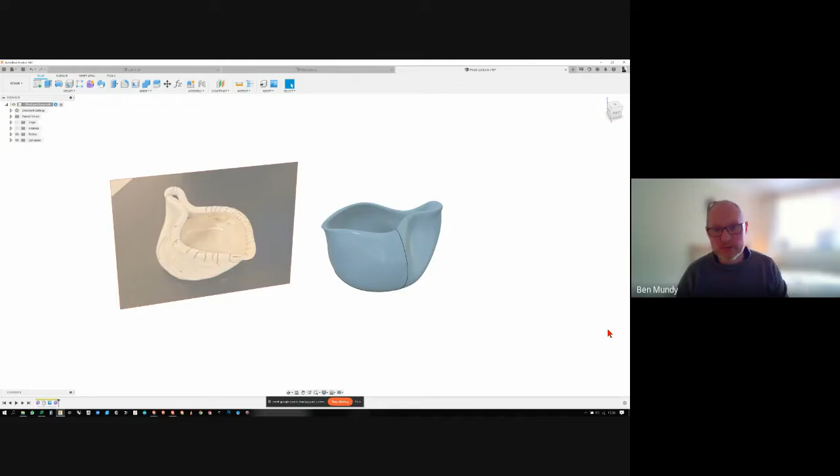Before we get into how I did that, I think it's worth showing you how to get into the Sculpt environment and some of the basic tools you'll find in there before we start looking at this main example.

So I'm just going to quickly open up a new design within Fusion, and we'll have a blank piece of paper basically. We're at the top level of Fusion, in the design workspace - that's where the Sculpt environment sits, amongst all your other standard 3D modeling tools like extrude and revolve. You can tell it's the Sculpt function because it's the only purple icon in the toolbar, and it's kind of this.

It looks like an exploding purple blob, basically. I'm not sure why they use that icon, but that's the create form or the Sculpt function, and that's what we're going to start working with.

So when we open up a new design, this is what we'll find in Fusion. Hopefully most of you have been on stage 1 or potentially stage 2 of the introduction to 3D, so I'm not going to show you all around the interface of Fusion again, because hopefully you'll have seen that. But if there are any questions or you're not sure about anything, just pop them in the chat as we go along and I'll answer them.

So in the main toolbar along here, we've got our create form button. It used to be called Sculpt in Fusion, and that's where I've got used to calling it. They've changed it to create form, but that's why I will sometimes flip between the words sculpt and form. I'm just going to press this button up here, and you can see that the toolbar has changed, and we're essentially now in this Sculpt function environment.

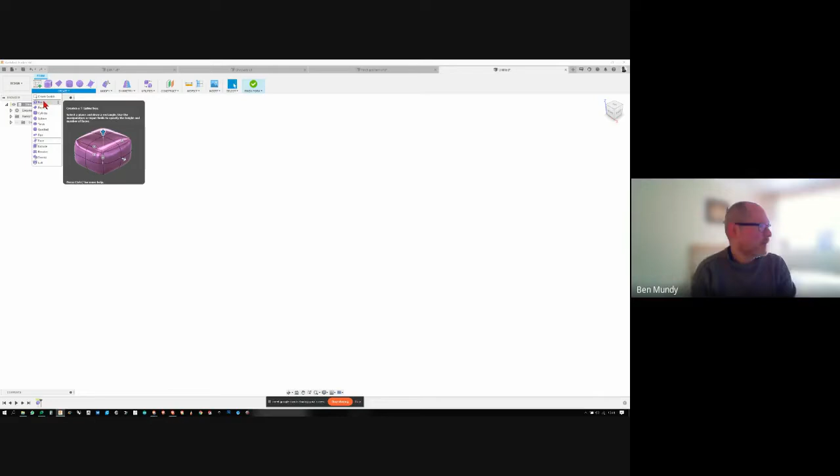So the first thing I'm going to do, just to show you how the Sculpt function works, is I'm going to use one of these primitives. So I've got the create menu here, and I'm going to create a box. The box function is also up here as this button as well, so I'm going to click on that.

You can see that what happens is that our origin comes up with the 3 planes, and we need to select a plane to start. We need to tell Fusion where we want to put our box. I'm just going to click on one of these planes to start drawing my box. When I hover over it with my cursor, the one that turns grey is the one I'm going to select, and it doesn't matter which one you select. I'm going to select the top bottom plane, so I'm going to click on that.

I don't know if you can see, but next to my cursor, I've got a little crosshairs now, and this is the midpoint of where we're going to start drawing the rectangle that makes the box. I'm just going to click on the origin point and click once more with my left mouse button, and this starts to drag out a rectangle. If you want to, at this point, you can add dimensions to the rectangle. I'm not going to bother, I'm going to work in a much more freeform way. So I'm just going to make some kind of rectangle and click with my left mouse button again.

And once I do that, hey presto, we're presented with this kind of blobby type box, this kind of rounded off box, and this is our primitive. This is the shape we've got from pressing the box button.

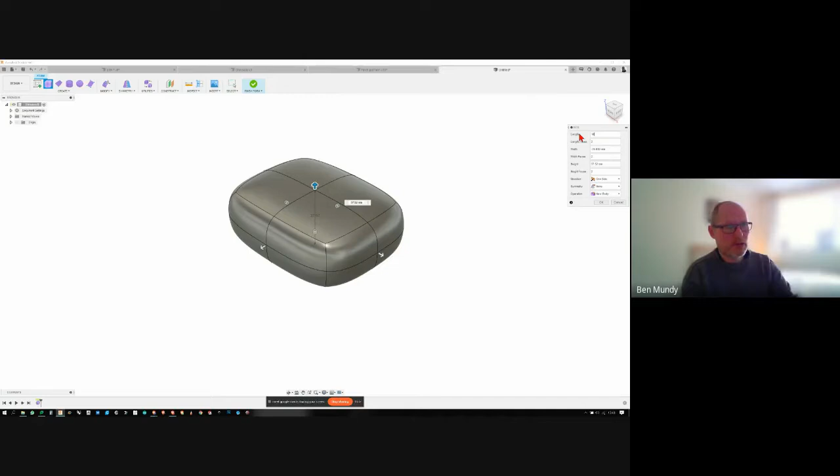Now we've also got a dialog box over here on the right hand side, and what we can do is start to change things within this box. We can change dimensions if we want to, we can make it whatever dimension we want, and we can change the number of faces it has. But let's not focus on that too much at the moment. What I want to show you really is how you start being sculptural with Fusion. So we've got our primitive here, I'm just going to put it around so you can see it.

To start actually playing around with it, pushing and pulling and twisting and all of those kinds of things, we're going to use the Edit Form button in the Modify menu. It's the one right at the top of the menu, but it's also this button here as well. So that's the way we're going to select that, and I'm just going to click on it.

Now we have this dialog box again over here, and there's lots of different ways we can select stuff, but we're going to ignore that for a moment and just have a look at the box itself.

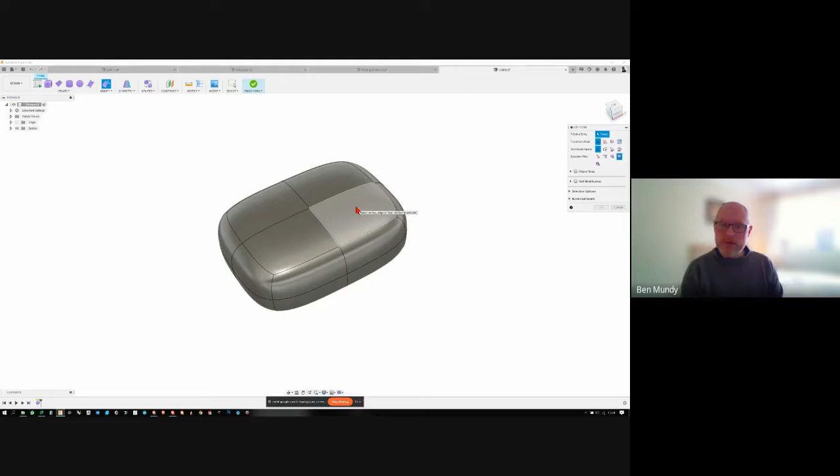Whilst I'm in the Edit Form function, I'm just going to click on one of these surfaces, and that selects that surface. When you do that, this rather complex looking modifier pops up. What I'm going to do is show you what this modifier does, because this is really core to using the sculpt function within Fusion and understanding it. It's pretty straightforward once you start playing around with it. I'll just zoom in a bit so you can see it better.

So this is the face that's been selected. If I start moving around some of these handles on this modifier tool, you can see what happens. This handle is an arrow pointing upwards, and if I click and hold down with my left mouse button and drag it up, you can see it drags up that surface. But it also drags the other surfaces in conjunction with it to some degree, and it does this in a fluid motion, so you'll always have a rounded, smooth form.

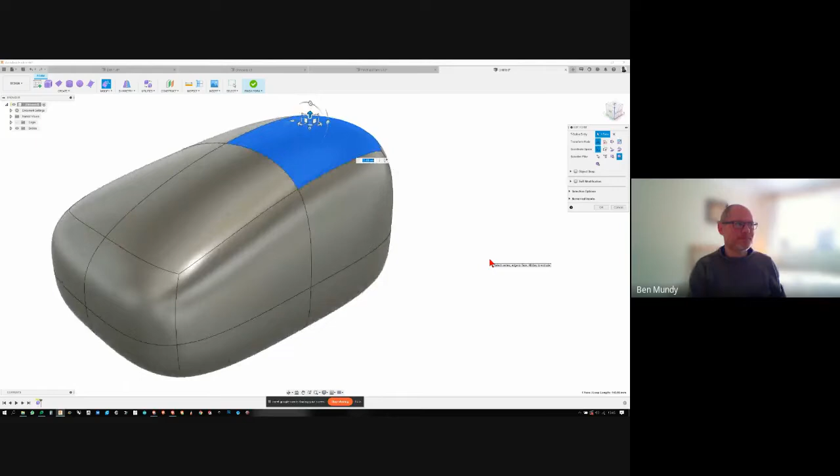So with this arrow, you can go up and down, so you can depress and push into things, or lift them up. The other arrows do the same in other directions. This arrow pulls or pushes along that axis, the x-axis, and this arrow over here does the same in the y-axis. So even just with those three arrows, you can begin to see how quickly you can start to mold your shape into something other than just a box.

So what happens if you want to move it in a direction other than those three set directions? That's a bit limiting. So what we have are these little squares in between each arrow. If you look at this tool, these squares sit between each of the arrows. This arrow pulls in this direction, this arrow pulls in this direction, but this square will pull and push in both of those directions at the same time—essentially on that plane, it will move it around along that plane. It's the same for these two arrows, this one and this one: the square in between them moves in both directions at once. And the same for the final pair as well. So those are the arrows and those are the squares.

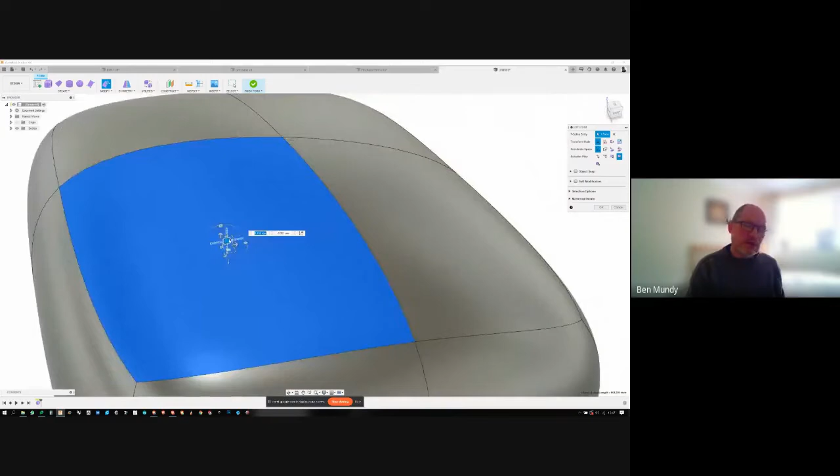What else we can do is also rotate this face, and we've got these arcs popping up here. We can grab hold of one of these circles in the middle of one of these arcs and start moving it around by holding down the left mouse button as you move it around, like dragging it around its arc. You can even set the degrees if you want, or just move more freely. Again, because we're working in 3 dimensions, we have 3 different rotator modifiers working in 3 different directions. So with one tool, we can move things in all 3 directions, and rotate things in all 3 directions.

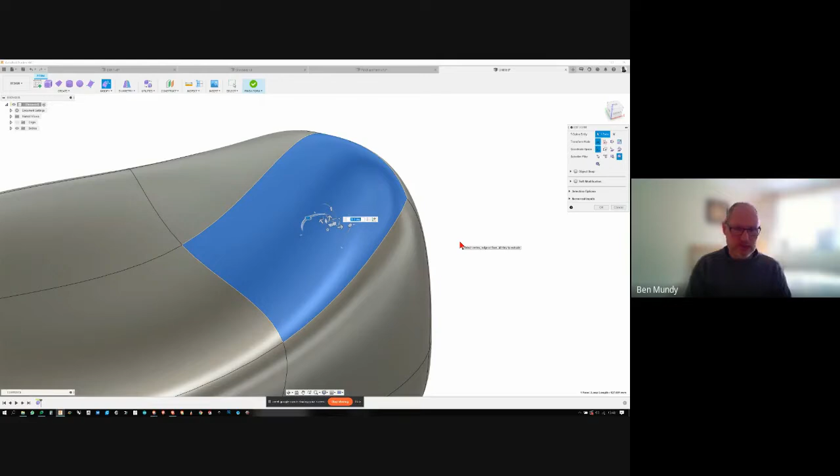But there's one more function the modifier tool has: we can also make this particular face larger or smaller in relation to the rest of the object. We've got these little lines around the edge of the square here, and these will scale the face in that direction. So I can scale that face up and down, scale it backwards and forwards along that axis, or in both axes.

We can do that the same for any of these modifiers, or any of these planes rather. We can scale it up in any of the 3 dimensions. And then finally, the last thing we can do is scale up and down the whole face, by dragging this one backwards and forwards. Just clicking on that and holding your left mouse button down and moving your mouse around slowly will scale that whole face up and down.

I just noticed in the chat. Sorry, Ben. Sorry to interrupt. We've got 2 questions, because I think 2 of the participants lost their connection for a bit, and they're wondering how you managed to create that form.

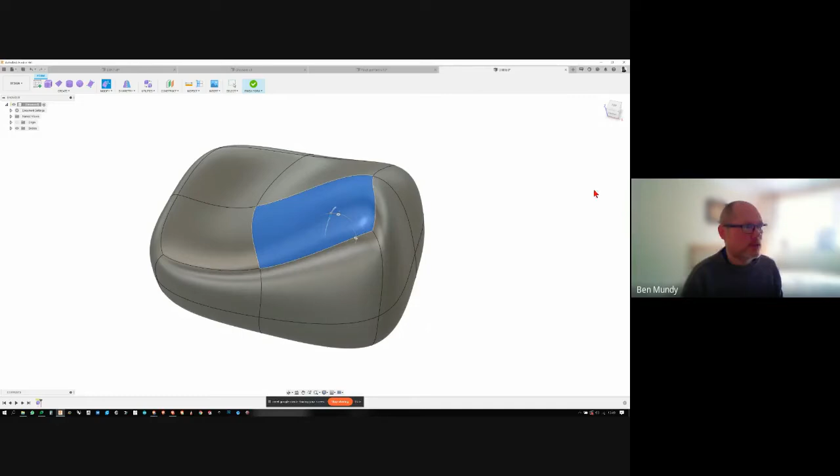Can you take us through that again? Yeah, absolutely, no problem at all. Let me just turn that one off and do it again.

So to create that primitive box, that first form, we're going to go up to the Create menu, and we're going to select Box. The same button also exists up in the toolbar, this one here, so either way. Once you click on that, you'll get the origin pop up, asking you where you want to start drawing a box. You need to select a plane onto which to draw a rectangle, which is the basis for drawing the box. It doesn't matter which plane you select. I'm going to select the top bottom one just by clicking on it when it's grey.

Now, it might be hard to see, but there's a little crosshairs on the tip of the mouse cursor, and this is the center point of the rectangle we need to draw. You can draw it anywhere, I'm going to draw mine on my origin. So I just click once, let go of the mouse button, and move your mouse around and it will start dragging out a rectangle. At this point, if you wish, you can put some dimensions in, or not, it's entirely up to you. Once you're happy with the size of your box, click your left mouse button once more, and we will have our box appear.

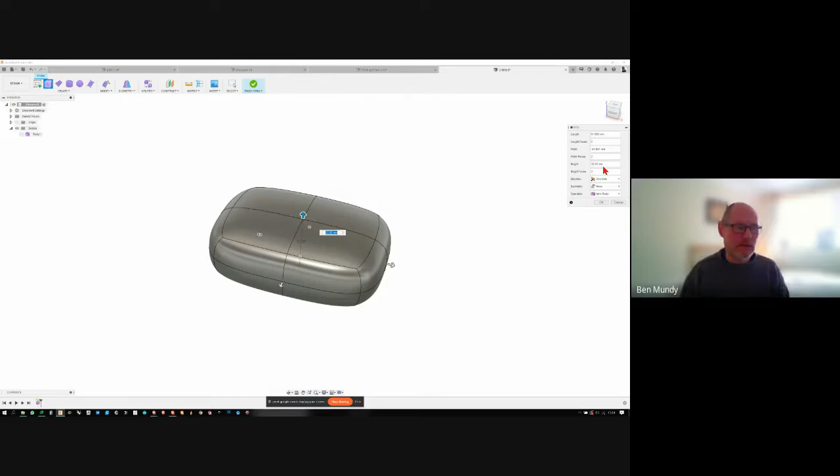We have our box modifier dialog box over here. I didn't show you this before, but I'll show you once again. We can change the dimensions of our box, but we can also create more faces in our box. At the moment, the box is subdivided into different faces, we've got 4 on the top, 4 on each side, and 4 on the bottom. But we can add more. We've got length faces, width faces, and height faces, so we can add as many as we like.

You can see what happens as I enter the number 4 into each of those dialog boxes. We end up with, instead of 2 faces across the height or width of it, we've now got 1, 2, 3, 4. It's entirely up to you how many you want. The more faces you put into your shape, the more detailed it can get. If you want a smoother, more fluid shape, you might want fewer, and you can always remove them later on if you want to. I'm just going to take this back, leave it something like that.

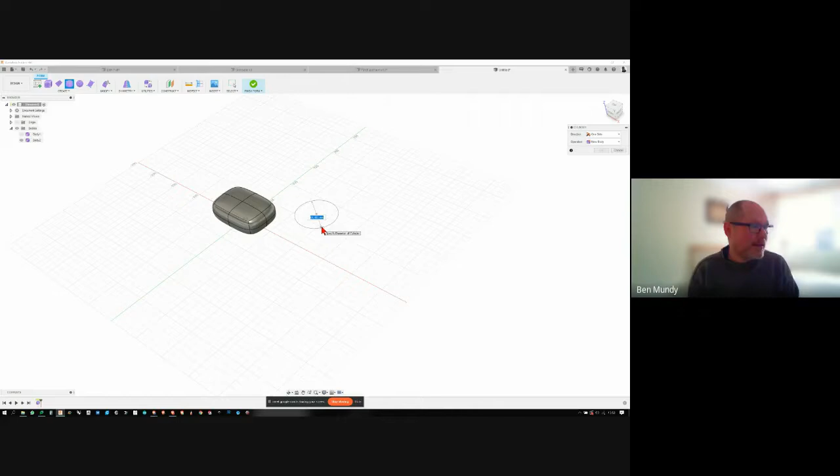So that's how a box is made, and it's the same for any of the other primitives as well. When you select any of these ways of making a primitive form, say we were going to create a cylinder, exactly the same thing: we need to choose a plane on which we're going to draw our cylinder. Again, I'm going to choose this plane, and we need a center point of that cylinder, then we can drag that cylinder out by clicking once with your left mouse button and moving your mouse around to the size you want, then clicking another time to actually create it.

And then we can modify that cylinder just by dragging it up, making it bigger, like so, or inputting information into the cylinder dialog box. So for any of these primitives, it's the same kind of approach. You have to choose your primitive and decide where you want it to be in 3-dimensional space first, before Fusion can actually create it. So get rid of that one.

So with the modifier tool, that's the core tool really that you're going to be using within the Sculpt environment. But there are other tools as well.

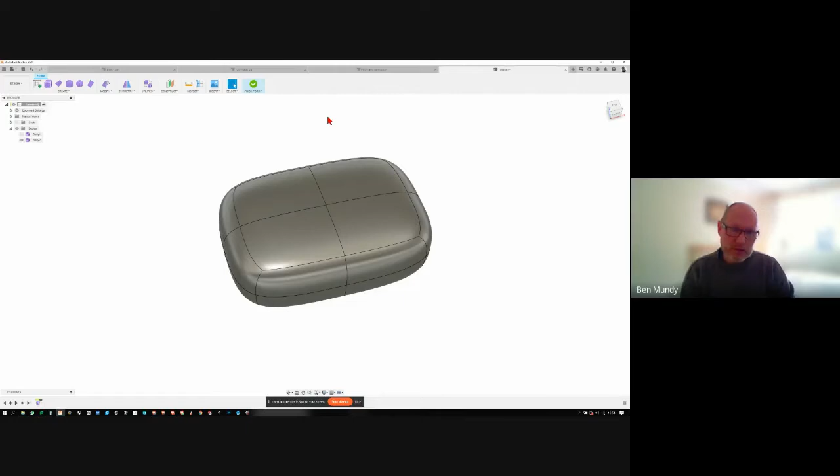One thing I'm going to show you right at the outset is the symmetry tool. Sometimes you want to create a form that has no symmetry, a completely organic object. But a lot of the time things we create do have some kind of symmetry, the same on the left-hand side as on the right-hand side. So Fusion's got a tool which can create lines of symmetry around any of the forms you've created in the Sculpt environment, and it means it's very easy to create symmetrical objects.

How do we do that? Well, we've got the create menu, the modify menu, and next to it a symmetry menu. There are different ways of creating symmetry, but I'm just going to show you one for today because it's the one you use most of the time, or I do anyway. It's this one, the mirror symmetry tool. It's very simple to use. I'm just going to click on it here.

What I need to do is create basically a symmetry line, like a plane around which both things happen the same on both sides. So I want my symmetry plane to run along the midpoint of my box. I'm going to select a face on this side, then select a face on that side by clicking on them with my left mouse button. If I do that, what we can see is that Fusion has created this green line all the way around our box. That's a line of symmetry now, or an axis of symmetry. I'm just going to click OK if I'm happy with that.

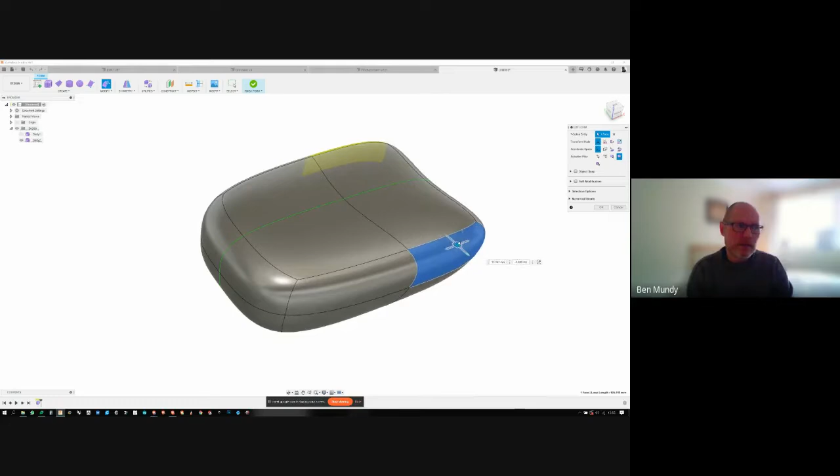So now if I go and use my edit form tool, which if you remember is the one in the modify menu, edit form, or it's the same one up here, click on that. Now say if I click on this face and start dragging this around, you can see the same thing happens on the other side of the form. So if you want to create a symmetrical object, it's very straightforward. What you do on one side is mirrored on the other side, and that can be a really useful function.

With the edit tool and the symmetry tool, there's a lot you can do in quite a quick period of time to start modifying your shape into something that might be recognizable.

So we can do a number of things with the edit form tool. We can modify a face like so, but we can also modify a line instead of just a face, and you see the line's moving rather than the face. We can also just modify a point as well, pulling that point out so that it's just that point being moved.

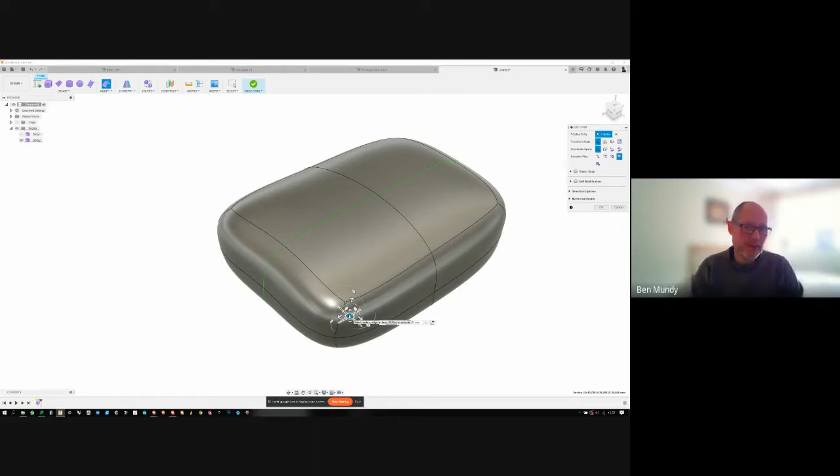It can be tricky to know when you're trying to create some kind of sculpture object which is best to use, whether you want to modify a face, a line, or a point. There's no right or wrong way really of doing it. It's really a case of playing and experimenting, in my experience, with the edit modifying tool to see what works and what doesn't work in what you're trying to achieve. There's no set way, in my mind, of doing it.

The other thing you can do, you don't just have to edit one face or one line at a time. You can edit all of them or a selected number of them. So say I wanted to edit this face, and this face, so these three faces, I select one, then hold down the Shift button on the keyboard, and whilst I've got that held down, I can select as many faces, lines, or points as I like, and that modifier tool will start to affect all of those.

So now when I move that up, you can see it's not just this face that's being modified, but all of those faces are being modified. And it's at the point where the grey faces meet the blue faces where the actual real stretching, or compressing, occurs.

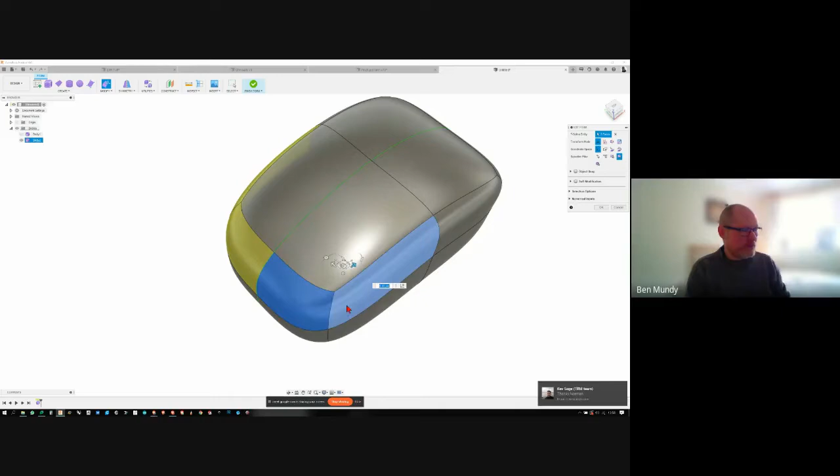Hopefully you can see that that's a relatively simple way of starting to make a form which would be hard to make using standard modeling tools that you find in Fusion. And we can play around with this to our heart's content, and it's quite easy to get to something quickly, which might look something like a computer mouse, for instance.

Bring this in, put a little undercut in there, select maybe this line, down. The whole thing's a bit too tall. So you can just play around and grab the surfaces and start playing around till you get a shape which you like the look of. Let's see, I'm going to select this one and make this a bit more curved at the back, pull this out so it's a bit more rounded.

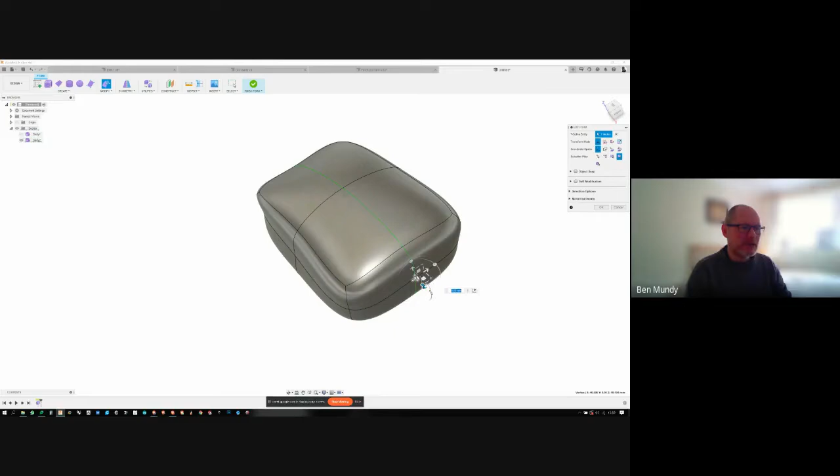So to round something off, this was a flatter form. I've just grabbed the middle line in between those two faces and pulled it into a more circular, bulbous shape. Whereas if you go in this direction it goes more concave. Selecting the line there will do that. Whereas if I select the faces here, that will just move the whole face backwards and forwards. I could try and select this point, and that would work, but then you're going to be making the whole thing rounder in that direction as well as that direction.

So it depends what you want, obviously. But it's a case of really playing around with the edit form tool and familiarizing yourself with the different ways that it works. I find it's quite fun—you can tinker to your heart's content to get it just how you want it to be.

Now, with Fusion, if you've used it before, you'll know it records in the normal design workspace every step you do along the timeline down here. But you can see we're in the Sculpt environment, which is represented by a single icon down here. What we don't have in the Sculpt environment is a record of every single edit before—it's literally more like a piece of clay. You can't go back in the same way as you can in the rest of Fusion, so once you've pushed something, you can't unpush it a few steps ago through the timeline.

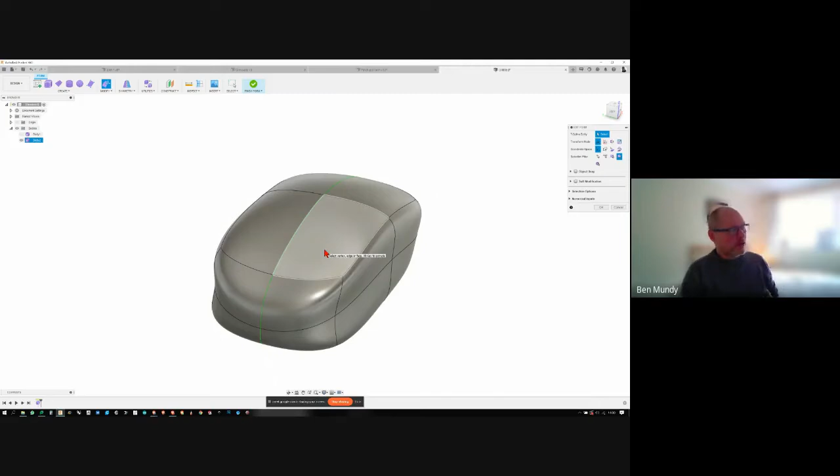However, we've got good old Control Z and Control Y, the undo and redo functions, which are pretty common across a lot of programs. So we can undo and redo your last however many—I don't think there's a limit on how many you can do. You can go back and forward as much as you like. If you go to the edit form, the undo and redo menus up here in the top left-hand corner, there's a drop-down menu of the last, say, 20 or so, but you can go back further than that if you wish. So that's the way you can go backwards and forwards with things you've done in the past and things you want to redo.

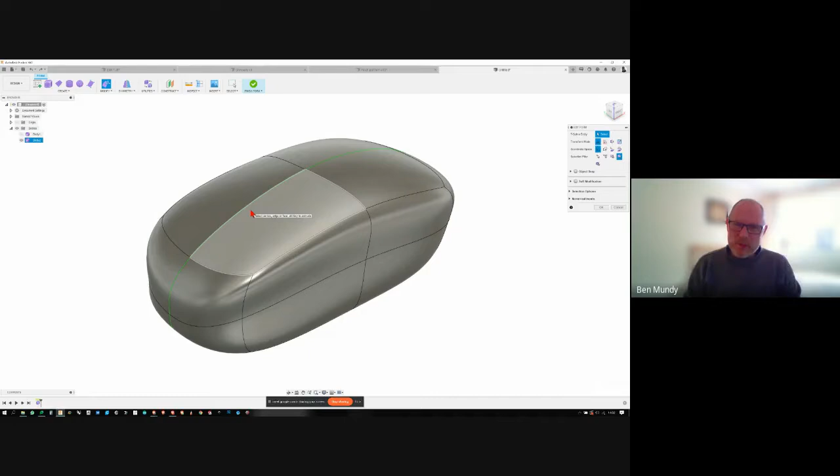So we've got the edit form tool, and that's really good for making blobby shapes. But not everything you want to create is going to be blobby—there's going to be angles and things you might want to put into a sculpted shape. It's useful at this stage to show you how to do that, because once you can put sharp creases into things and curves, combined with the edit tool, you can make pretty much any shape that you want, given enough time.

So say, for instance, I wanted a crease around the bottom, a sharp edge rather than this nicely smoothed edge. The way to do that is in the modify menu, with the crease function, about halfway down. With anything in Fusion, if you hover over any menu option it gives you a useful pop-up box with a visual description of what the function does. This one creates a sharp edge between faces, very simple. I'm going to click on that, and we get our crease dialog box popping up over here.

It's basically asking us which of these geometry lines we want to crease—it has to be one of the lines that we've got here. So I'm just going to work my way around and click on those ones there. And if you remember, because we've got our symmetry line here, you just have to do it on one side and repeat that on the other side.

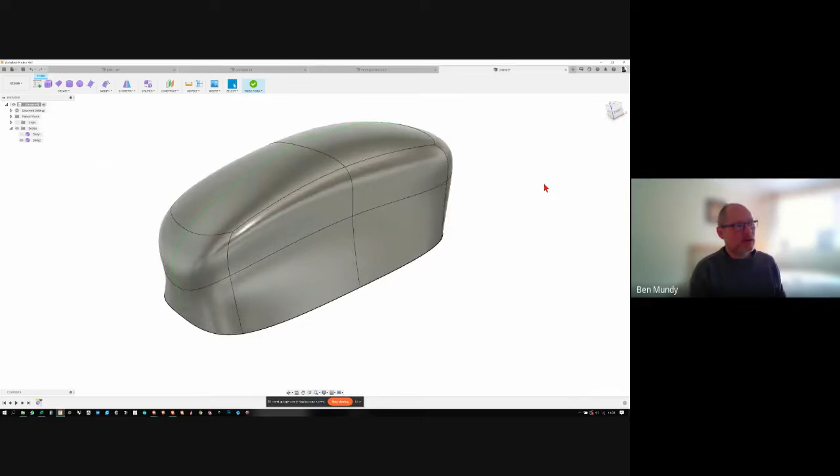I hope you're happy with that. Click OK, and it turns from being bright yellow back into the color we're working in. And you can see now we've got a creased line around our chosen vertices.

So we can still modify this. You can still go back and click our edit form button and start to modify this as well. Maybe that's a bit too wide, I want to bring it in, maybe have it slightly underneath the form, like so. Maybe we want to have it up a bit. Maybe not, maybe like it like that. So you can still modify these elements as well, as much as you like.

Ben, we've got a question from a participant who's asking about designing a car. Would you recommend using the Sculpt environment for that?

Definitely, yes. I'm assuming you're asking about the body of a car - there's obviously lots of components that go into making a car. For the outside of the car, yes, definitely the Sculpt environment is the right thing to use. There are some great resources on YouTube specifically about how to use the Sculpt environment in Fusion to design a car, and it's actually really good for car design. It's quite advanced, the kind of Sculpt tools you're going to be using, so it's not somewhere I'm going to go in this workshop, but yes, definitely a good option if you want to design a car.

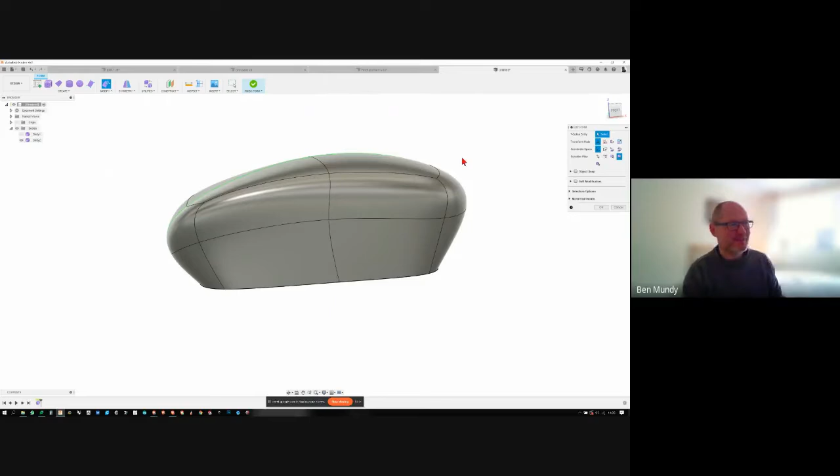But for now, we'll keep it a bit simpler and go back to drawing this mouse. You can see we're beginning to get something that might look a bit like a mouse, and you can play around and select as much of it as you like - bigger, smaller, wider, whatever you want to do, really.

Just by playing around with all these different functions and seeing what works for you - I'd say the only way you can really understand the Sculpt environment is to start experimenting with it. What we'll do later is ask you to make a box, a bit like this, not necessarily a computer mouse, but you could do that - just to start pushing and pulling and getting a feel for this function. I'll be on hand to troubleshoot and understand any problems.

But before I do that, I thought I'd show you how I used this to make that vessel, that pinch pot, which I showed you earlier, and also some real use case examples we've done in the Fab Lab using the Sculpt function. So I'm just going to move over to the pinch pot form design.

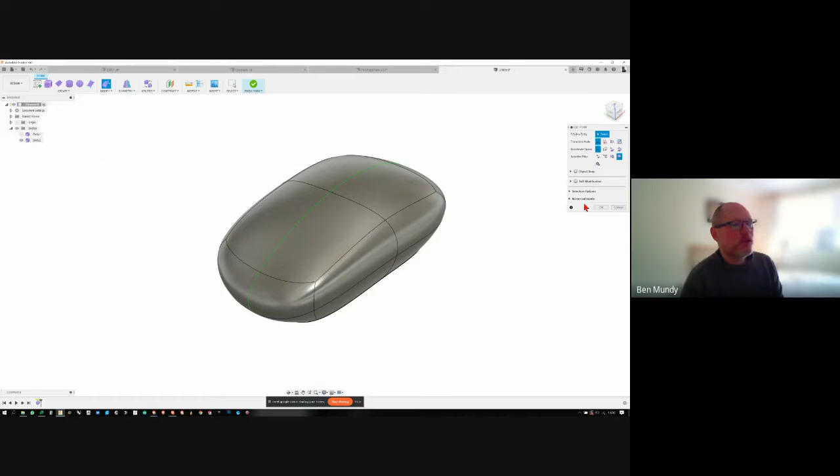Obviously we can just start playing around in the Sculpt environment, but often when you're designing things, you might start off with a sketchbook and some 2D sketches. It's worth showing how you bring those 2D sketches into Fusion and start using them as references for your Sculpt form - that's a useful way of transferring your ideas from a sketchbook onto a 3D platform like this.

So I'm going to do a new design and show you how I go about that. Before I do that, what I did was basically sketch this jug from 3 sides - looking down from the top, a straight-down top view, looking from the side, a straight-on side view, and looking from the front. So we've got 3 sketches in what might traditionally be known as an orthographic projection - the front, top, and side views in drawing terms. We can bring those sketches into Fusion and use them as reference, so I'm just going to create a new design.

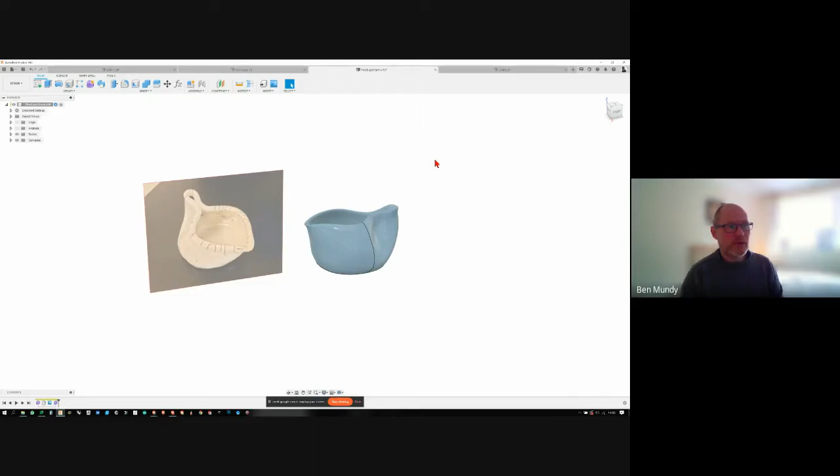What we can do within Fusion, before we go into the create form function, is insert a canvas, which basically means insert a picture. For the gentleman asking about cars, this is a way you might take a car design from a sketchbook and start using it for reference when you're 3D modeling.

So I'm going to click on canvas, and let's see, I've got them here somewhere. I'm just going to click on the drawings of my jug I did earlier. It's asking me where I want to put this sketch, what plane I want to put it on. I'm going to put it on the side plane, the right plane, because this is the side sketch. I'll click on that one.

I'm just going to zoom in a bit so we can see it. It's kind of just a hand-drawn sketch of the side of my jug, a very low quality sketch. It doesn't have to be a beautifully drawn thing at all. I'm just going to click OK. So we've got one sketch here.

That's fine, we know what it might look like from the side, but we might also want to know what it looks like from the top and the front, so we've got all three views in one place. I'm going to add another couple of sketches in by clicking on canvas.

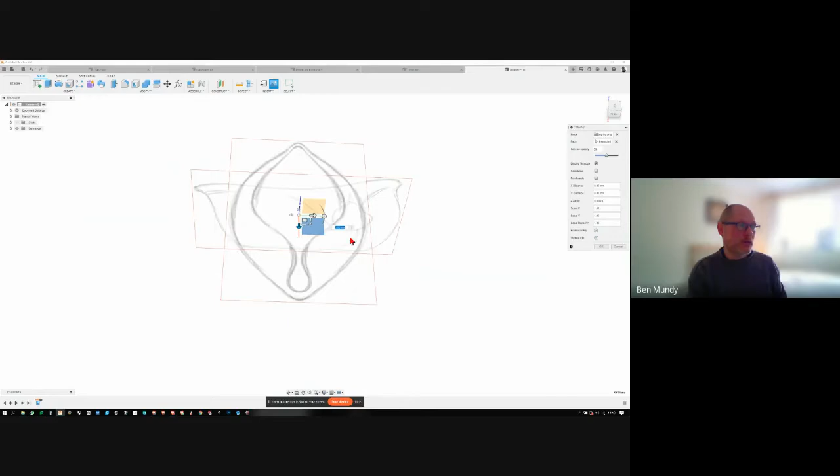I just wait for that to upload. So I've done the side, let's do the top. This time I'm going to use the top plane and put this in on the top. Now we can see that's not coming the right way round, so we can just turn that round, so it's that way round. That makes sense. Click OK.

So now we've got our side view, we've also got our top view, and this is really useful because they're intersecting each other like that. We can start using those as reference material in a minute. Then the last one I'm going to put in is the front view.

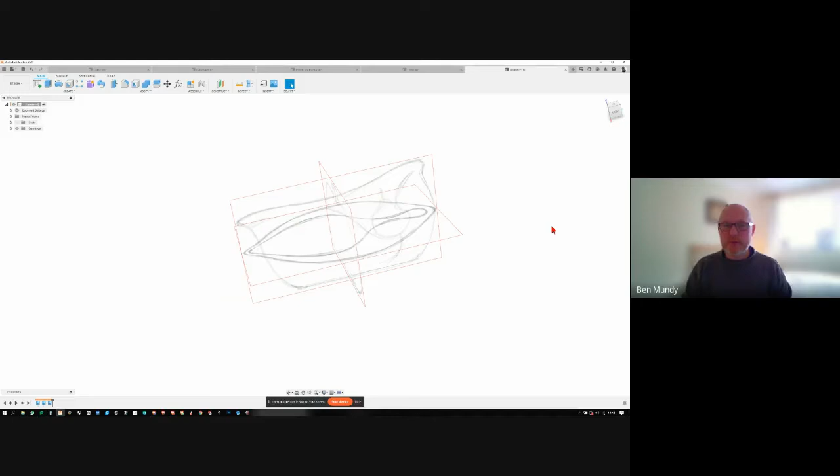Now that's coming a little big, so I'm just going to reduce that, like so. So we can see we've got something approaching a kind of wireframe of the shape we're trying to create. This is just for guidance, so we've got something to work from rather than just working from our heads, which we can do, obviously.

So I'm going to go into the create form of the Sculpt environment by clicking on the icon up here, the purple box, and I'm going to start trying to create this jug form.

Where to begin? Well, we're going to begin with a primitive. The primitive I'm going to use in this case, I could use a number of them, but I'm going to use a cylinder, because essentially this is a vessel, a hollow thing, and it's got a base to it which we can put in later. The cylinder is the closest one to a hollowed object with an open side. When selecting a primitive, you want to choose the one closest to the form you want to create. Sometimes it's not obvious, sometimes it is, but for anything hollow, a cylinder is a good place to start. I'm going to click on cylinder.

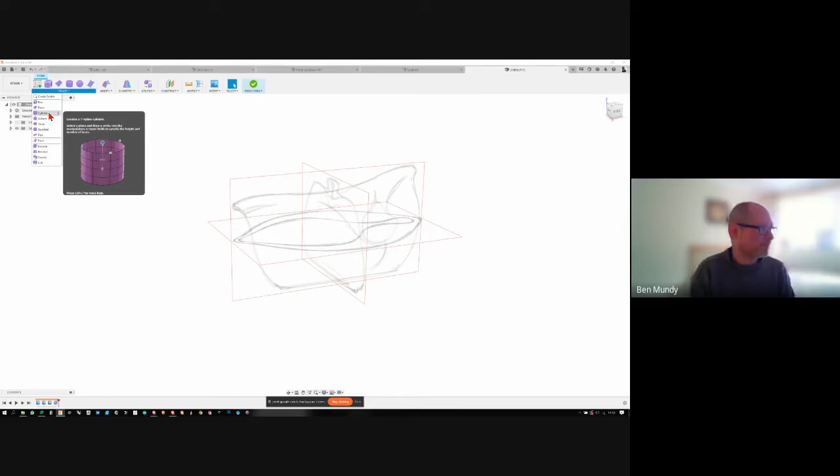It's asking me where I want to start drawing my cylinder, so I'm going to start on the top plane. I click on that, it will select the top plane, and I'm just going to drag out a cylinder approximately to the edge of my jug. It's giving me this preview of the cylinder, but it's only doing it on one side. I want the cylinder to go from both sides, because there's a whole lot of stuff down here that needs to be modeled. So if you look in the cylinder dialog box, we can choose a direction.

We can do one side, or we can do a symmetrical cylinder. If I click on symmetrical, it will go both sides. It's the same with any other function you have in Fusion when it comes to extruding. Then I'm just going to reduce it in size so it's approximately the right height. We're not trying to be really accurate here. I'm just going to click OK. I think I'm happy with that.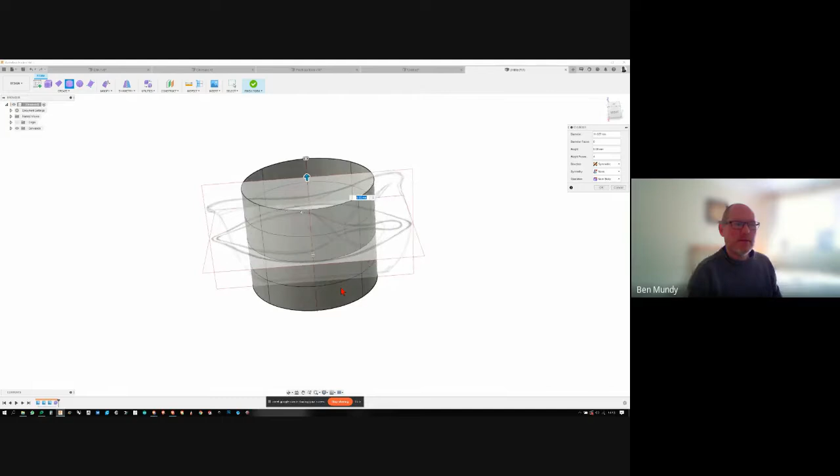We may want to put in some more faces here, we may want more detail to get this form. Let's just try putting in 6 here just to give me a bit more detail potential. I'm going to click OK.

So we've got something that looks nothing like a jug, but a lot like a cylinder. So now we need to start manipulating that to turn that into a jug.

But before I do that, if we think about our jug, it's got a line of symmetry running through the middle of it, so it's important to put that symmetry in now. It will save us a lot of work later on. Obviously, the line of symmetry is essentially running along the y-axis, down the center line of that jug.

So I'm going to put in the line of symmetry to make the modeling easier. I'm going to click on the symmetry button up here, then click on this face and then this face, to either side of where I want the symmetry line to be. So the symmetry line is now there, basically along that plane. That's where the symmetry line is.

So now here comes the fun bit. We can start modeling, pushing and pulling this cylinder around to start trying to get a jug form. So we're going to use the edit form tool, if you remember.

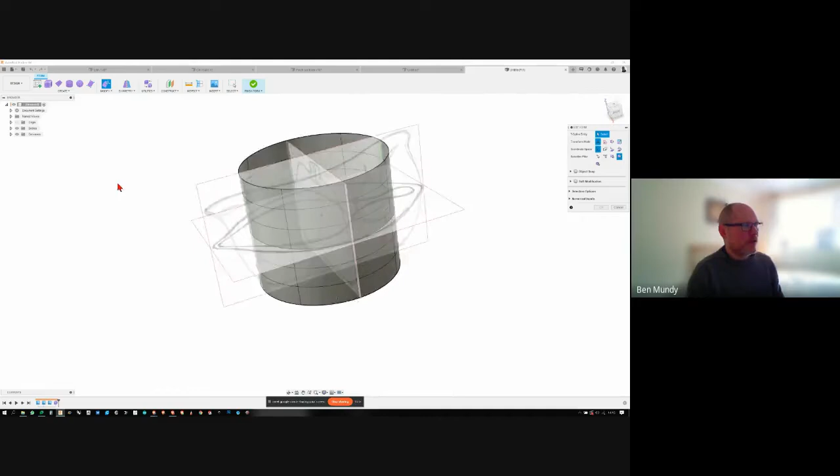So let's see, okay, I'm going to select perhaps these ones, and let's just start trying to pull into place what we want. This is really where you have to spend quite some time, really just taking your time and pulling everything that you want into place.

The best way of doing this is if we look side on and work around each of our views one by one. So if I click on the side view, we can just drag our form, not so it's exact, but so it's relatively close to the profile we're trying to achieve.

So you can see I've just picked up lines and points and used either the arrows or the multi-directional move tool to move those around. So we've got something approaching the sketch form that we have from the side view.

And we can do the same again over here, just drag that one over there. We just work our way around basically. Now that's gone completely wrong, we'll see. So I can play around with this, bring this one over here.

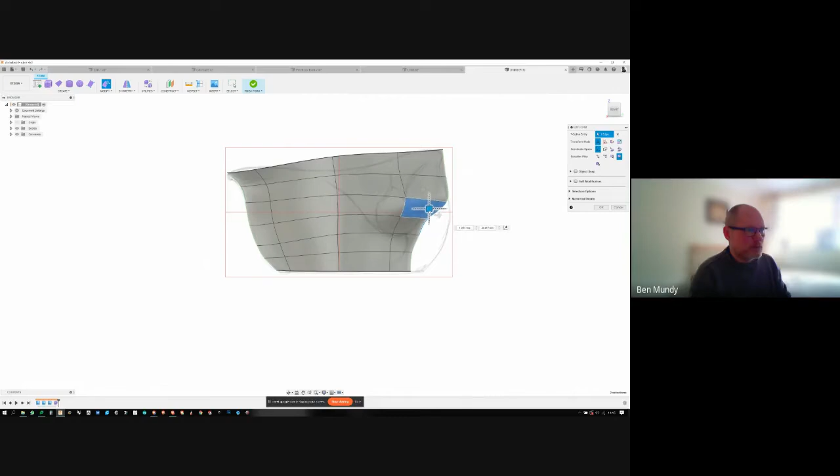But you can see relatively easily, just by clicking on points and moving them around, we can start to get the kind of shape we're looking for just from the side profile. So we've got the sides, or the end of the jug, and the front of the jug. We also need to do the top.

So let's bring that down somewhere like that. It's not exact, but we can slowly manipulate this as we go forward. We're just going to try and get an approximation at this stage.

So once we've done it from one side, if we turn it around, we can see, oh well, that's good from one side, but it's not very good, say, from the top. So we'll go back and start modifying from the top view.

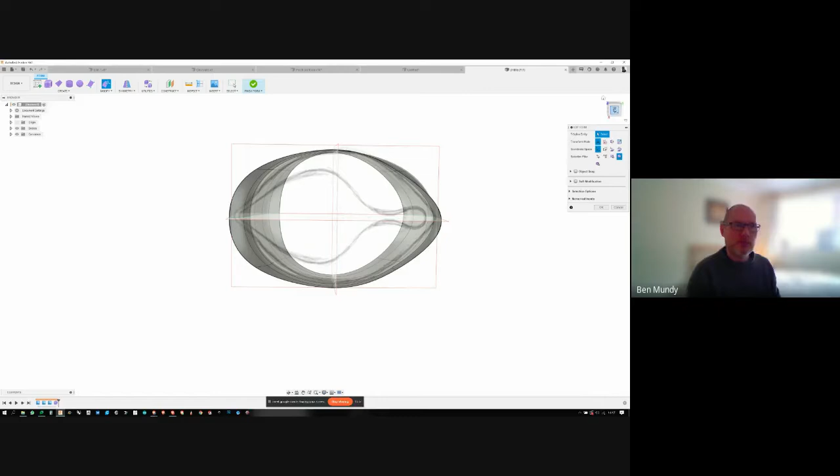And again, we could just pick up different points and start dragging. Often dragging points around is quite useful, or sometimes dragging lines around works. Points is a good place to start, in my experience.

And we can turn it around and also maybe pinch it a bit. And then finally, from the front view, hopefully we can just about make that front view around here. We can see, obviously, you're going to need to do some work here to start bringing it in to something closer to what we want.

Moving around, just picking up on the points and mostly clicking on the point and then using this square tool in between the arrows to modify it, to get somewhere to what we want.

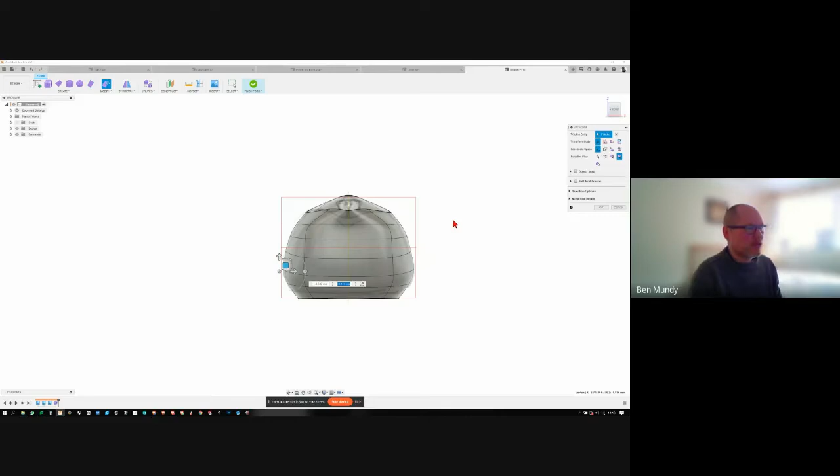So there comes a point where you want to stop using those side, top, and front views, and just start working in 3 dimensions. We can have these canvases on, but if they're getting in the way, and at some point it all gets a bit difficult to look at, we can turn them off very easily.

And if we look over here in our browser, as soon as we brought in those canvases, it created a canvas folder, and we've got jug side, jug top, and jug front. If we want to, we can just turn them off and on all together, like so. I'm just going to turn them off for now, because then we can see the form a bit better, and we can start manipulating it without those getting in the way.

So here we have the modify form again, and we can just start picking up different points within our shape and start moving them around, start making it go.

I think what you're often trying to do, as you turn your model around, is just be aware that everything is done with your mouse's middle wheel. By zooming in and out, by rolling your middle mouse wheel in and out, you zoom in and out. And by holding it down and using it as a button, you can rotate around your object.

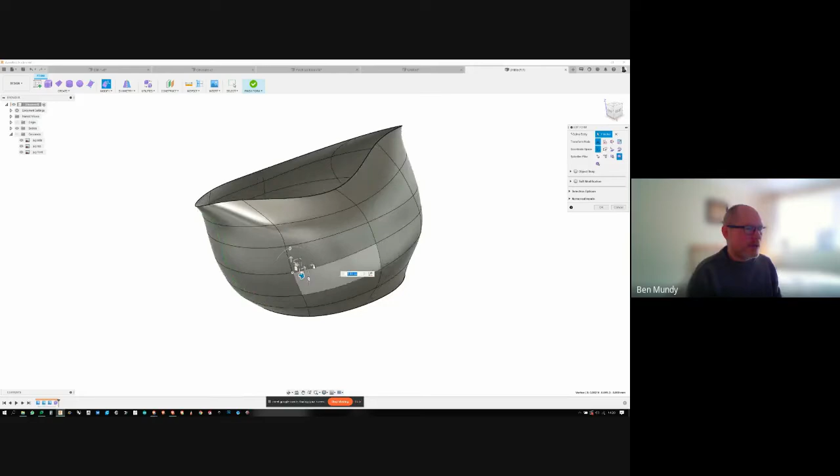But if you see these lines here, they're not very smooth. They're kind of going in and out a bit. And what you often want, not always, but often, is smooth curves. That's what you're trying to achieve with these lines. So I might think, oh, that's not looking too nice there. It's looking a bit awkward.

So we can start to move those lines around. This particular line here is a smoother line. Maybe something like that. Bring that one out a bit. Bring that one in. If you work your way around and look at these in different directions, if that line becomes smoother, then your whole object will become a little more smooth as well. Unless you want it to be obviously not smooth, but that's often a good way of working.

with Sculpt in Fusion, is to use these lines as a reference. Do I want it to be smooth here? Do I want it to be bulbous here? And you can work your way around.

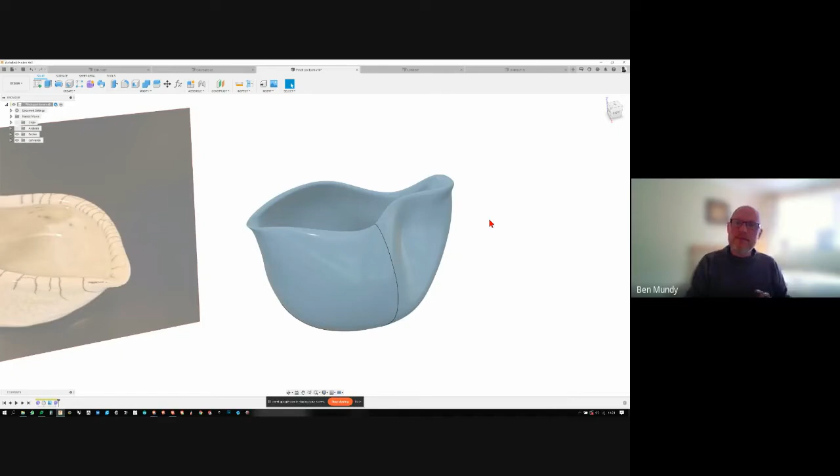And it takes quite a while to end up with a pinch pot like the blue one I showed you over here. Have a look at this one. But hopefully you can see, by lots of manipulating of that shape with that edit tool, in time you can get to a shape that you want. It just takes a bit of practice, really.

But what we also need to do - say we were happy with this shape, and obviously it needs more work, but say we were happy with this shape. In fact, I'm really not happy with that. That's annoying me.

Say we were happy with the shape. Well, obviously, we need to give it a bottom surface down here. It's obviously got a hole in the bottom. It wouldn't be much good for any kind of liquid.

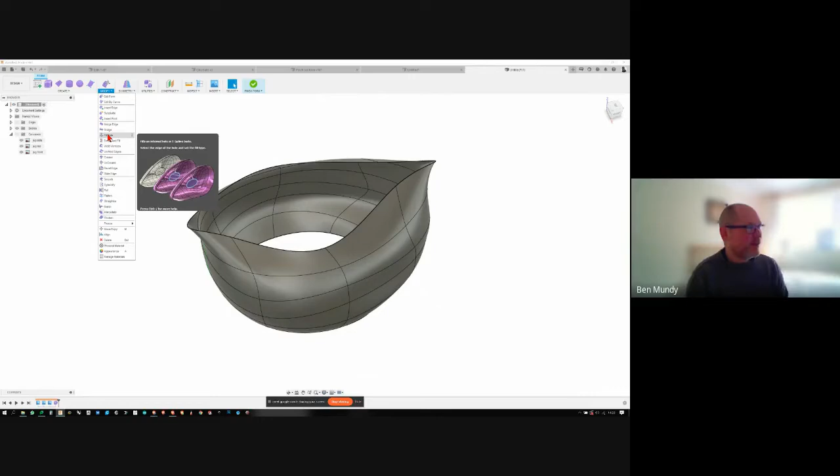So we need to fill the hole. And to fill a hole, believe it or not, there's a fill hole function in the modify menu. If we go over to the modify menu up here, about a third of the way down, we've got a fill hole function. It's very straightforward - I'm just going to click on that. This dialog box pops up, and it's basically asking what hole you want to fill. Well, it's this one. So I'm just going to click on any of these lines around here. And if I click on one of those lines, it works out, okay, that's the hole you want to fill.

There's different ways that hole can be filled. You've got different modes - a collapse mode, a fill star mode, and a reduced star mode. Entirely up to you, whatever you like basically. I'm going to go with this one. You can also, quite usefully here, put in a crease at this point, which you might want to do. I think I'll put in a crease at this point - I want a slightly more creased edge at the bottom of the pot.

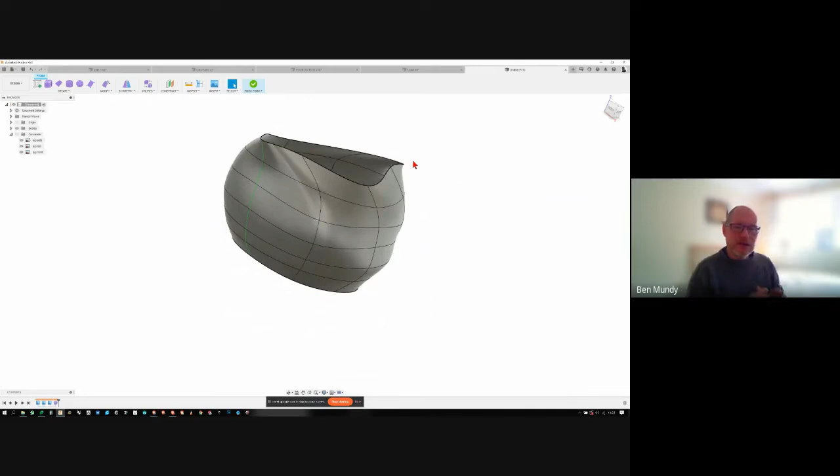Okay, so we've now got something which is a surface. This form has no actual thickness to it at all - it's just like a piece of paper, if you like, or a piece of fabric. But obviously you might want to thicken up your pot and actually give it a thickness. So within the modify function, again, we've got a thicken tool. So if you created a surface and you want to give that surface a thickness, we can use the thicken tool, which is about three quarters of the way down.

So if you click on that, the thicken tool dialog box pops up, asking what do you want to thicken. I've only got one form here in this particular design, so I'm going to click on this.

Turns blue, so it's been selected. You can see a little dialog box here with 0 millimeters popping up, asking how thick you want your thicken to be. We can give it a dimension here. Might be too much.

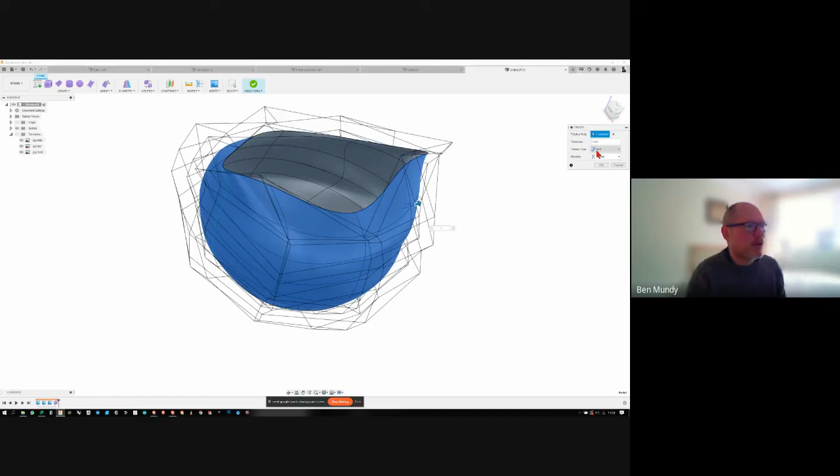1 millimeter dimension. It's giving us this preview of the thicken type, and we've got different ways of thickening: a sharp way and a soft way. As it thickens, it will either have a sharp edge to that thickness or a curved edge. I think I'll go for a curved edge on this one, let's try that and see if it works.

Okay, so you can see now, hopefully, this vessel has a thickness to it, and it also has a rounded edge where that thickness occurs. So we've used that soft function for thickening and the rounded edge. That had a standard thickness in this case of 1 millimeter. I must have done this very small, and this is also a very small pot, but that's beside the point at the moment.

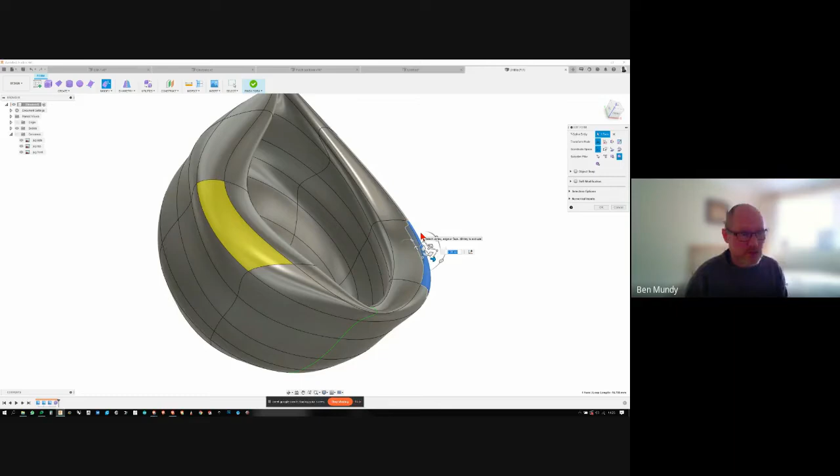But we can still go back and edit this form. Now we've done all of this, we can go back and modify this. If we want to change the thickness at any point, some parts of this pot might be thicker and thinner, but that thickness tool only happens at that point. If I edit or modify, say, this surface here, you can see the whole wall gets a lot thicker here. So it doesn't maintain that thickness throughout the rest of your editing. You can just use it to thicken at that point and then go back and play around where you may want a thicker wall or a thinner wall.

So there we can see we've got something which looks vaguely like the pinch pot that I designed earlier on. And I think those are the core sort of tools I wanted to show you as a way of starting off with the sculpt function.

There's a lot to know about the sculpt environment, but the thing to do is get familiar with how to create primitives, how to edit using the edit form tool. That's the really important one. And perhaps how to put creases into things, how to remove creases.

Just to mention, if you want to crease things, you can, but if you want to uncrease things, you've got an uncrease tool as well. So it's very easy to crease things, and if you don't like it, go back and remove that crease. Perhaps how to fill holes and how to thicken things up. Those are the core tools you need to start playing around with to get used to working with the sculpt environment.

So say you've got to the point where you're happy with your sculpt form and you want to come out of the sculpt environment, maybe go into another part of Fusion, or exit altogether and take this onto a 3D printer. Once you've finished all the editing you want to do, we've got a finish form button up here, a big tick box. And if we tick on that...

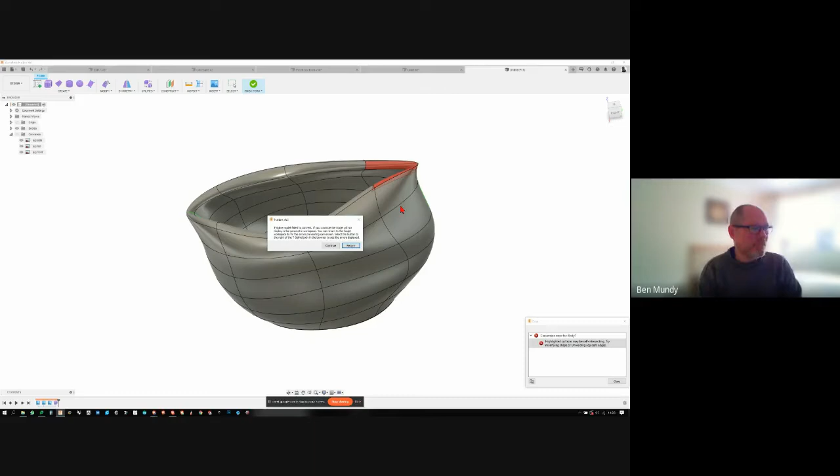So I'm just going to return to that effect. We can see it's probably just gotten really tight and thin at this point. It might even be overlapping slightly in this form, and that's something it can't have. It can't have an overlapping form.

So let me just see if I can modify this. Oh yes, if we zoom in, you can see, hopefully, that we've got two surfaces overlapping slightly. So let's see if we can just remedy that. Put that out there for now.

And let's see if we can finish that form. Okay, so now when I press finish form, that's worked. Okay, we are now back in our standard design workspace with all our familiar design tools that we have in Fusion, and we can start using those design tools on this form.

We can start extruding into it, we can cut into it. It's a solid object in the way that any other solid object appears in Fusion. If we want to go back and edit this form, that's absolutely fine.

We just go down to our form icon in the timeline, and if we right-click on that, we can edit it, and then we're back in the Sculpt form. We can do that any time within the timeline. If there are features done afterwards, we can always go back and edit that form and it will rebuild. So it's just like any other solid body within Fusion at this point.

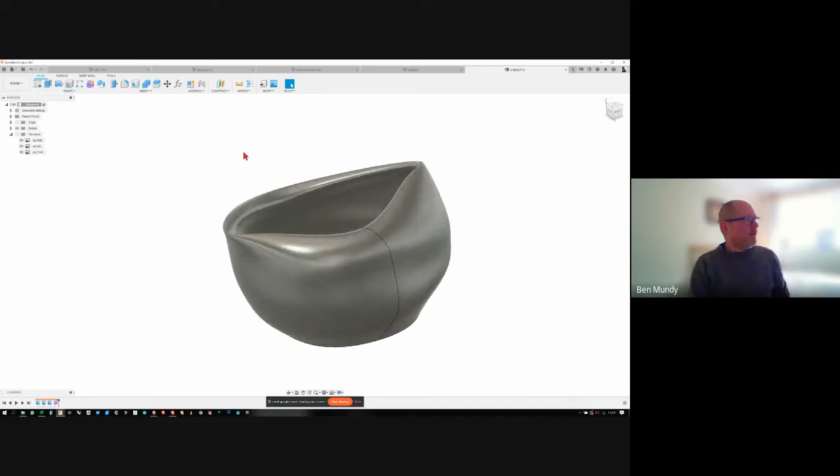Before I move on, I'll show you some use cases. I'll quickly show you how to export this, so you can take it to a 3D printer or some other kind of CNC machine. Let's take a 3D printer, for instance. What we need to do is export this out of Fusion as an STL, stereolithography file format.

The way to do that is kind of hidden within Fusion. It's not in the file menu, and it's not in the export function where you might naturally think it would be. It's actually within the browser down here, and what we have to do is go to the bodies folder within the browser.

This is a body within Fusion. It was a modeling body, that's its terminology. We need to open up that folder by clicking on that little triangle. And this is it, this is body 1. Turn it on. What I need to do is right-click on body 1 and save as STL.

Again, I don't know why it's tucked in down there, but that's where it is. So we save that as an STL, and we get a dialog box popping up here. The only thing I'd say is when you save anything as an STL in Fusion to take to a 3D printer, the refinements might default to low or medium. I would always put it on high, since you want as much detail as possible coming out of Fusion and onto a 3D printer.

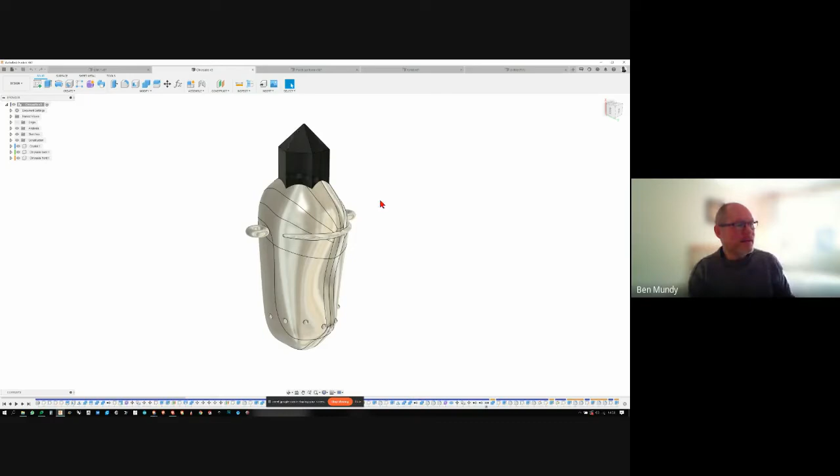So in just the same way we worked with the pinch pot, we were able to bring those photographs into Fusion and start using that as a starting point to model this shape. You can see it's quite an amorphous, blobby shape. It would be hard to model using the other functions within Fusion, but it's really quite straightforward with the sculpt functions, and as you can see, it's got a line of symmetry running along the middle, like so.

So quite similar in some ways to that pinch pot. And I think if I remember rightly, we just started off with a ball and started pulling that ball in different directions.

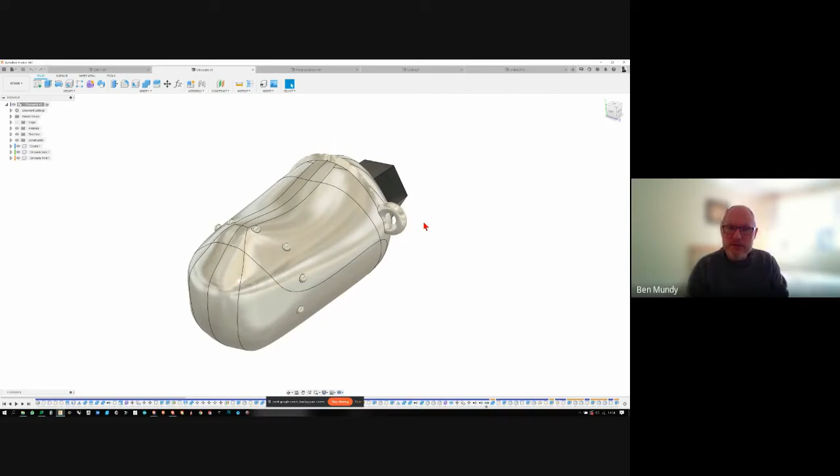So we got to the point where we had this outer shape, but then we were also able to put in these other shapes, which were part of the chrysalis, these kind of little blobs, for want of a better word, these other features that were in that chrysalis we were trying to replicate. Again, we used the sculpt function to bring in a primitive, and you can merge things together to create one shape.

Once that was done and we created that shape, we then took it back into the design workspace, and then we could start doing all these slightly more mechanical things required to make this pendant, hanging from a necklace.

Would have a crystal in it, and this crystal would lock the two halves of this chrysalis together. So if I just take that crystal out, we can see inside we modeled the hexagonal holders of this crystal, and we split the chrysalis into two halves. The idea was you would bring these two halves together and put the crystal in, and it would all lock together. You could hang it around your neck as a piece of jewellery.

And the idea was that this was then cast in silver, to work with the pre-existing crystal that the student already had.

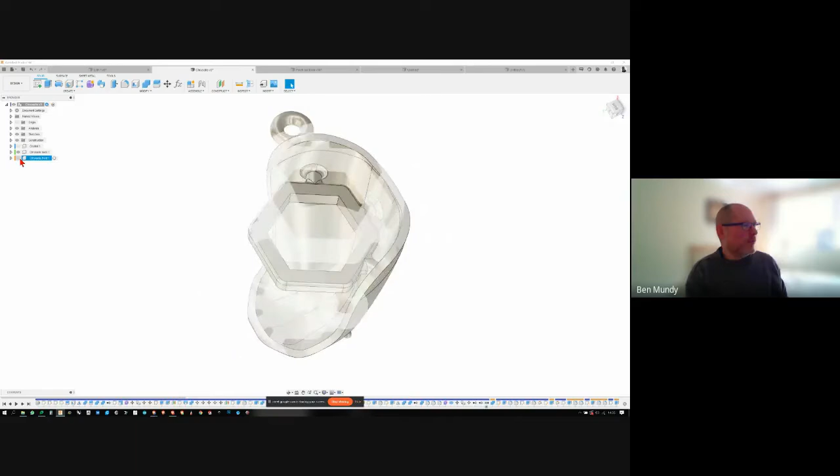Relatively complex in some ways, but working through the steps that you've seen with the sculpts, and perhaps steps you might have seen with just basic extrusion functions within Fusion, to create these kind of hexagonal shapes, which were then linked to the outer form of the sculpt. It looks complex, but actually it wasn't really particularly complex, I'd say.

And the output from this was we were able to print this piece, so these pieces, using one of our resin printers in a castable wax. That's a type of wax which can then go down to the jewellery maker's foundry and be cast, in this case, in silver. So it was made.

So that whole process occurred, starting off with some pictures from a sketchbook and photographs, coming into Fusion, modeling it, designing it, and then 3D printing essentially a mould, or a tool for a mould, to actually create the piece of jewellery in the end. So it's quite a nice example of how you can use Sculpt for this.

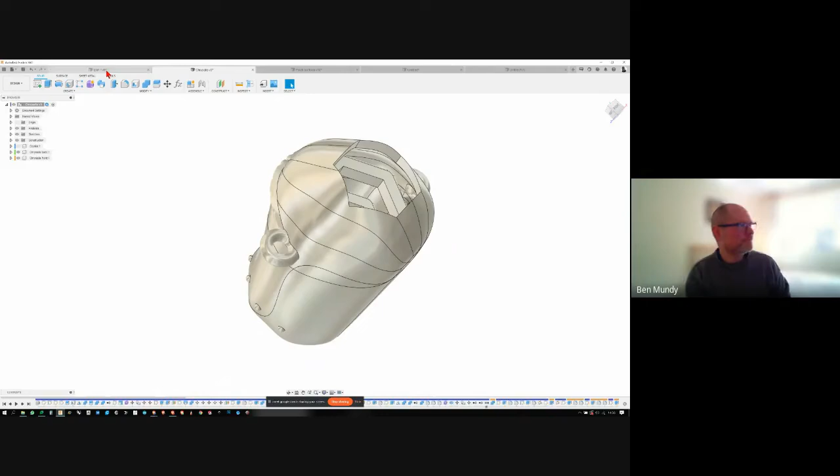And I've got one other thing to show you, which is completely different, but it shows you a whole other way you could use Sculpt. And it's quite relevant for these times at the moment.

So this is an LMA. This is a medical device that we were working on with a company. We work with all sorts of companies at the Fab Lab, and we were working on this laryngeal mask airway. This is if you get COVID or end up in hospital, this is the thing they'll shove down your throat to ventilate you. Really unpleasant experience, and you're unconscious when this happens, and you're sedated.

But basically, this is connected to airways, and you're ventilated through this tube, and this is the bit that goes into your throat and is pumped up to push your airways open, to keep your airways clear so you can breathe.

But the reason I'm showing it to you is because we used the sculpt function within Fusion to create this shape here. Now, this is actually quite a complex shape in some ways to create using the other functions within Fusion, but it's actually a really simple shape to create in the sculpt function, and it was created perhaps in a few seconds. So this is where it's useful from a point of view of productivity and doing things quickly and efficiently.

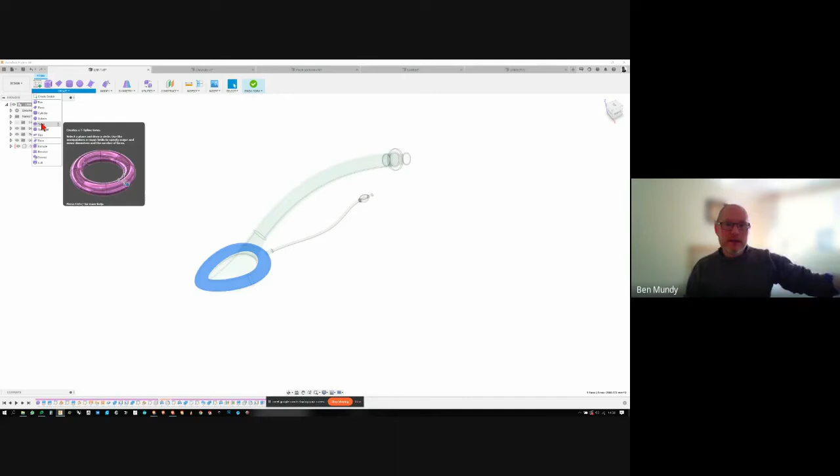And if I go into the sculpt environment, you can see how quick it is to do it. If I click on the torus function, you can see how similar, hopefully, that circular shape is to this kind of egg shape.

And if I create a torus shape down here, just next to it, so you can see. And perhaps I give it some symmetry, and then edit it. You can hopefully see. Select all sides of this, let's just grab it, select all sides of these. You can just start filling that out very quickly into a shape that looks a bit like that.

You can see how quickly you can do that. Whereas if you were to try and do that using some of the other functions of Fusion, you might be there 10 or 15 minutes trying to create that kind of shape. But it's got different applications, is basically what I'm saying. You can use it for very sculptural, ergonomic, organic shapes, but you can also use it in product design for doing things quickly, which you can't do easily in another way.

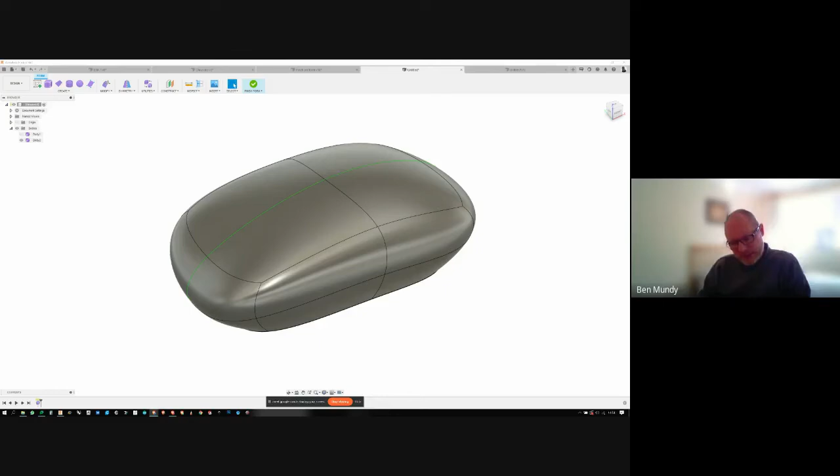Fusion is quite good for this. You can use that scan to create a female two-part mold on that object, which can be used to slip cast if that's the process you want to use.

You can also change the scale of the prototype, enlarging it if you want. That's something that's very easy to do with this kind of thing - you can scale things up very simply.

Yeah, which I find very exciting, because my models are very small really - hand built, hand size - but you could improve the size and the shape. There are so many things you can do. It's really fantastic, I think.

Thank you very much. What we can do now, if we've got some people with Fusion, it would be a good time to have a go right now with it. If you're having any problems, you can share screens and we can troubleshoot any issues with the early stages of using the Sculpt function. Sometimes it's easy to click the wrong thing and get a bit lost, so just for those first few times you use it.

So if anyone does have Fusion loaded onto their computers and wants to use it, now would be a good time. If you do, I suggest you try something along the lines of the mousy shape I did earlier on, because it's a nice simple one to start exploring and playing around with. Other than that, we can carry on with the general discussions and Q&A.

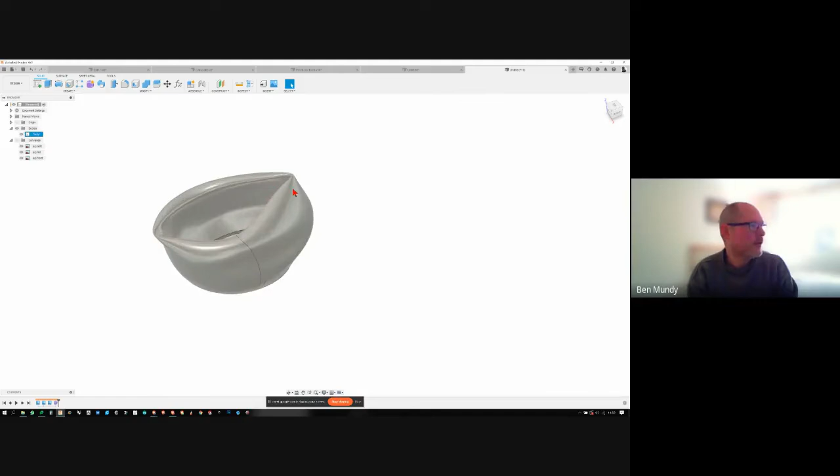What I'll do is make another one of these jugs quite quickly and show you how to fill a hole again, rather than try to go back and find that point where I did that. So let's create another one over here, and put a bit of symmetry in so we get something like it was before.

Having the wrong thing here. Okay, so we've got something beginning to look jug shaped like that.

What we need to do is fill this hole down here. So you come out of the edit form, finish the edit form, and then go to the modify menu - create, modify, and about a third of the way down we've got the fill hole function. Click on that, and then we need to tell Fusion which hole we want to fill, because at the moment there's two - one at the top and one at the bottom.

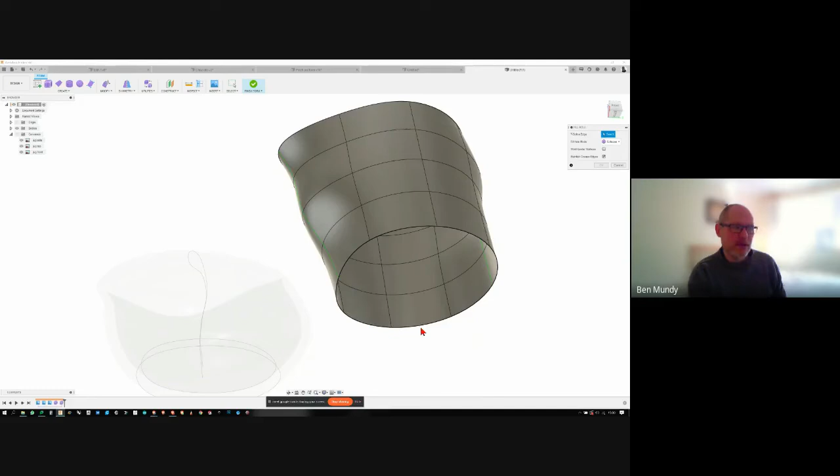So we're going to fill the one at the bottom. All you need to do is click on one of the edges of the faces which are on the edge of that hole - I'm just going to select one of them. And then we've got fill hole mode, and there's different ways we can fill this hole.

As I said before, it just creates different faces or surfaces which you might want to manipulate later on. You can have one which is a filled star in this case, or a collapse, which makes radial faces. We can also either crease that hole or not - it's entirely up to you, just by ticking that on there. And that's all there is to it.

And now you've got a filled jug. I don't know if anyone is deciding to have a go with Fusion 360. I can also show you how to potentially make molds at this stage from a sculpt form like we've created, which might be useful - please let me know in the chat if anyone's interested in seeing that.

Yeah, we've got a question from Catherine - can you use the different parts of the jug and put it out in the normal Fusion instead of the Sculpt environment?

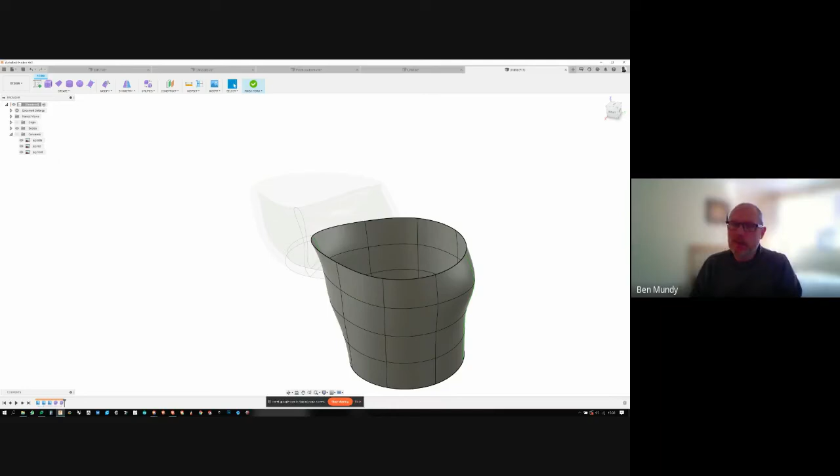So yes and no - you can't work in a sculptural way within the standard workspace within Fusion. Let's just show that actually.

Let's just give this a quick thickness and turn that into something like this. So if I go back into Fusion here, let's just turn this one off and have a look at this one.

We can't start editing and modifying it in the normal design workspace. There is something within Fusion known as direct modeling, and there's a press-pull function, but it's not really suited to sculptural form, so I don't think it would work if we tried to do this in any way. We can expand it, we can contract it, we can make it a bit bigger, we can make it a bit smaller, but if we want to sculpt something, we need to go back into the sculpt environment to do that.

Yes, you can't do that in the workspace. That's what we're trying to say. Yeah, you can add different components to it though within the normal sort of Fusion environment.

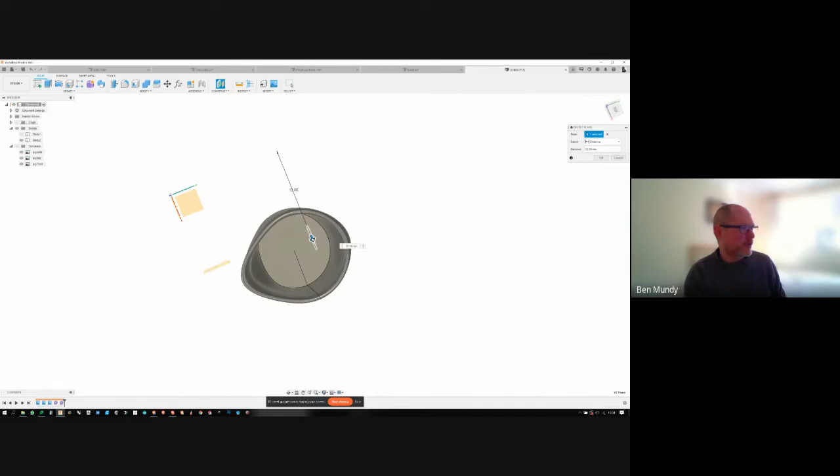Absolutely. So, say for instance, like a handle. Let's put a handle in so I can show you that. So, for instance, we can start to model in a handle quite easily using the standard Fusion methods of 2D sketching followed by a three-dimensional feature. So, say something like this. So we have kind of a handle.

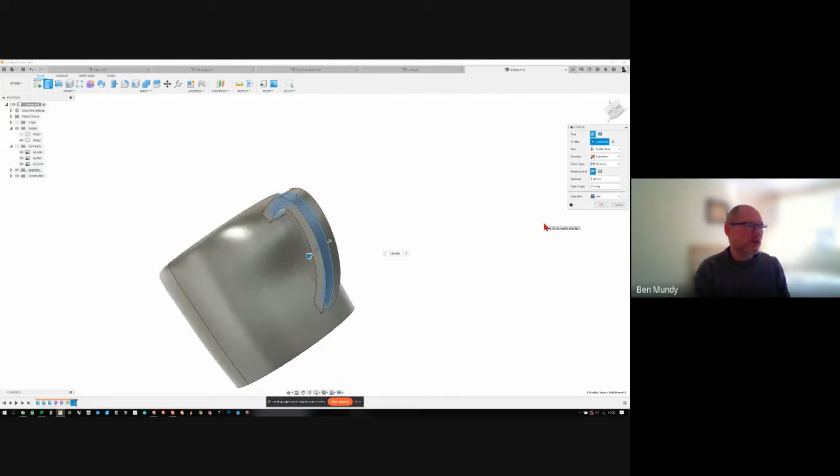So all I'm going to do here is that, so we can then use our extrude function here, and then we can extrude out a handle. This will merge then with what we've already got. So we've now got a handle, and now this is one solid object, so it's not separate. It's a merged handle, so we can put a handle in, and we can do the things we might do normally within Fusion, like pop some fillets in, like that, and you can make something that looks like a handle.

So very simply, we can start using those extrude functions. We can cut things into it, and we can extrude out from it, and just stick stuff on and put a handle in very simply.

I think people are saying yes to seeing mold making, so I might share that in a minute. And Eman, you're trying to make something like a human.

Well, that's quite ambitious, but not impossible with the sculpt function. Yeah, you can. There's no reason you can't start trying to mold a sculpt form into the shape of a human. You can make any shape that you want. I'm just trying to think of a simpler way of doing that, perhaps.

You might, obviously, have photographs in the same way of a person standing from the front, the side, and the top. You could also find pre-existing sort of models of humans. There are big CAD libraries out there, online libraries, where you can download models for free. So if you want a human, even if you want to make your own, it might be useful to have that model in your workspace as a template to start working from, or just as reference.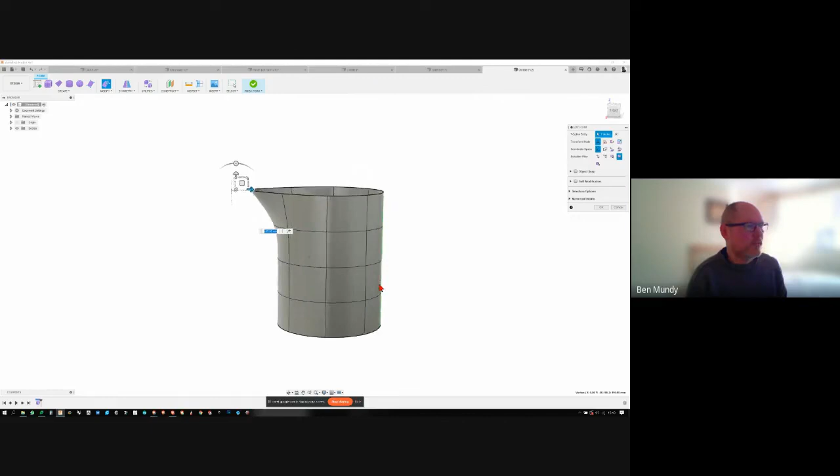Right, so let's just create something here to make a mold from. Briefly, not too long. So we'll just do a really simple jug form for now. Like that. Take this side. So let's just go with something like this for a jug.

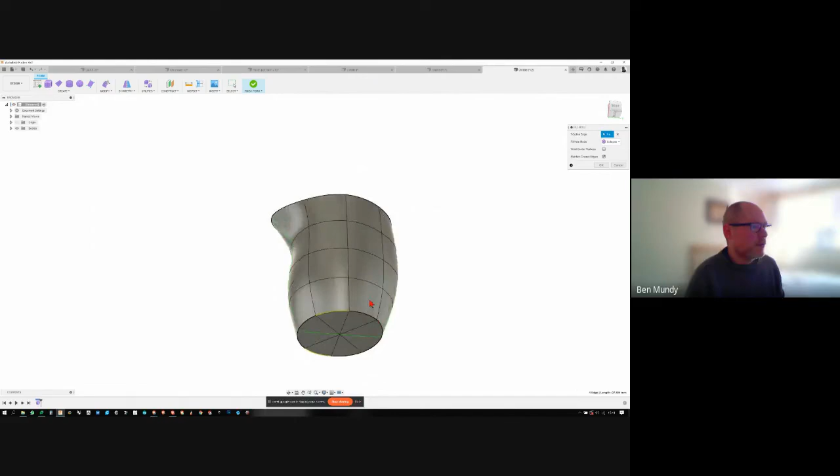What I'm going to do to make this mold, I'm going to fill the bottom, but in this case I'm going to fill the top as well, because obviously we're doing some kind of slip cast mold. That's what you're going to need. So I'm just going to fill the top and the bottom, and the top as well.

So say this was the shape we were going to turn into a two-part mold. This is the shape that we've got, this is our solid body. So what we need to do to create our two-part mold is actually draw the mold itself, or the outer form of the mold.

To do this, I'm just going to extrude a couple of rectangles either side of the jug, and then we can use something called the combine function, which you can also use to intersect, to make that mold. I'll just show you, it's probably simpler.

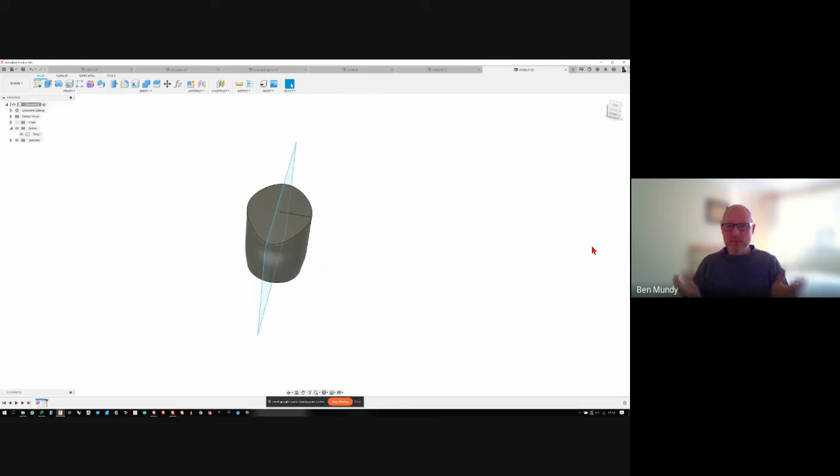Once we've got our object we want to make a mold from, I'm going to basically just draw a rectangle around it, like so. We can see that rectangle is exactly on that midpoint, so this is the split point in your mold, if you like. From that, I'm just going to extrude it this way, deeper than the object itself.

Now, at this point, Fusion is thinking we want to cut away that jug form, but we don't want to do that. What we want to do at this point is create a new body, okay? So this is a secondary body, we're not joining it to the jug form. We're just creating a new body, and they kind of overlap. I'm just going to click OK there.

So we've got our jug fitting inside this rectangular block. But what we need to do is tell Fusion to remove the area that this jug exists in, if you like, inside that block. Now I'm just going to make this a different color so we can see it a bit better. Just make this one green, this one red.

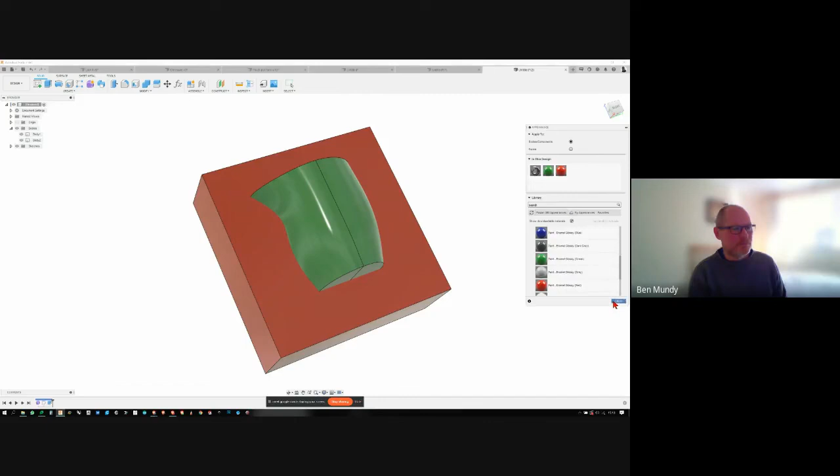Under the modify menu, I've got a combine tool, but this combine tool can also intersect as well, or cut away, and we're going to use the cut function. I'm going to click on combine, and this is the dialog box over here, and it's asking us two things: what's the target, what are we trying to cut into, and what tool are we using to cut into? So the target body is this rectangle here, this would be the mold form, and the tool body is the jug itself.

Then it's asking us what do we want to do: we can either join it at this stage, we can intersect it, or we can cut it. We want to use the jug tool to cut into that mold, so I'm going to click on cut. I'm also going to click on keep tools. If I don't click on that, it's going to remove my jug altogether. I want to keep the jug, but I also want the mold, so I'm going to click on keep tools and click OK.

And hey presto, it looks like nothing's happened. But now if I turn this jug off, or just hide it for a minute, and to do that I go over to my bodies folder, open it up if it's not open, and just turn off body one. And now you can see you've got that pressed-in form into that mold.

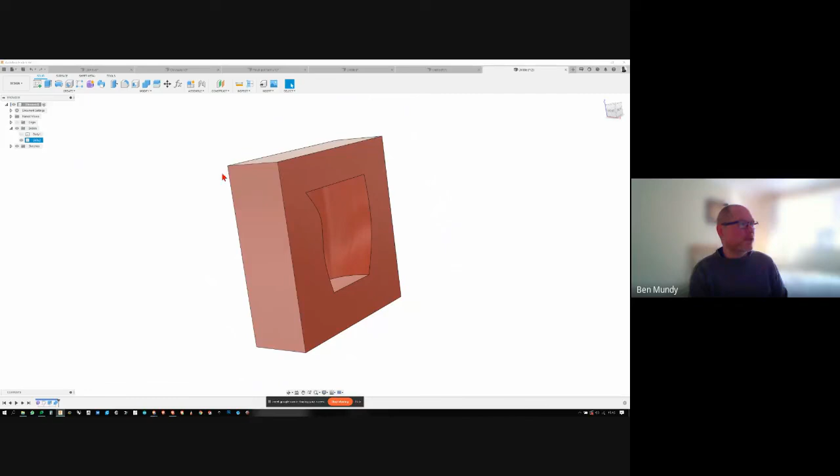Obviously, because this is a symmetrical object, we can just mirror this one over. But with mold making, you usually need some kind of reference holes and bosses to align those two molds, so it would be a good idea to put those in now. I'm just going to show you how to do that, it's really useful to know. I'm just going to put a couple in, so you can put in as many as you like. Three would be a good idea. Okay, one over here, and one over here.

And just going to do a little segment like that. I'll show you why I'm doing this in just a moment.

So what I'm going to do with these is just revolve these into a semicircle. You grab that and the axis, and join.

And this is the kind of thing you need to do so that we can do the opposite of that into the other side of the mold, if that makes sense. Obviously we could do the other one on the other side, but I'll just do one for now.

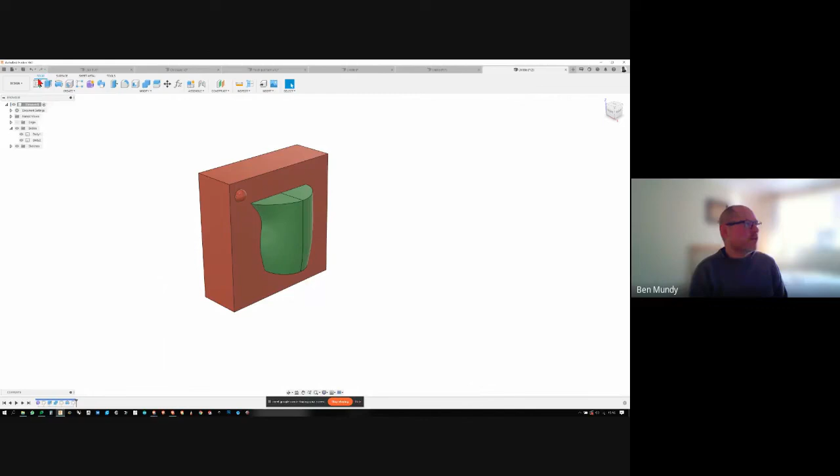So if we turn this one back on, I'm just going to create another sketch here, and what I'm going to do is do the other side of the form. Bring it out here somewhere like that. Again, I'm going to create a new body.

If I just turn off my back part of the mold here, we're doing the same thing again. We're going to combine, and we're going to target body this, tool body that, cut. We've got the other side.

We'll turn off my jug now. Again, we've got the other side. Oops, sorry. And now we've got our two molds.

The only other thing we need to do now is where we've got our little boss here, our registration boss, we need to push that into the other side of the mold so the two molds line up. Obviously you'd have more of these, but I'll be showing you one for an example.

And again, we're going to use the combine tool. This is the target body, this is the tool body. We're going to cut again, keep tools.

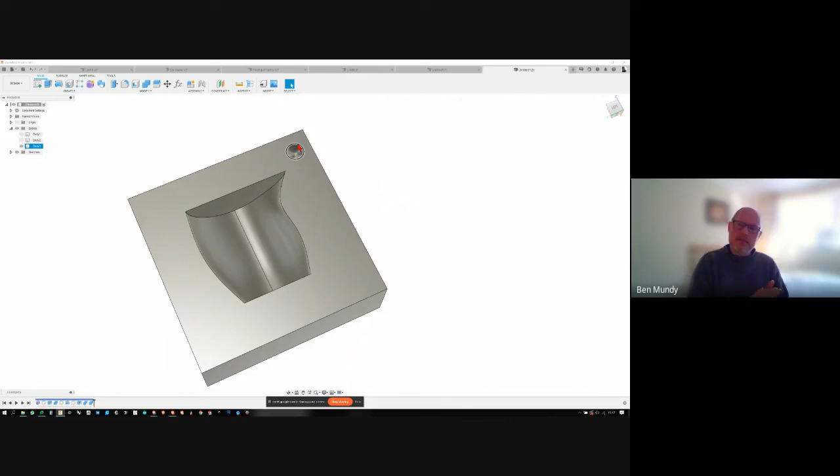And now if I turn this one off, you can see that cutaway, that recess would line up. So if you had a number of these dotted around here, those two molds would line up perfectly.

And then the last thing you might need to do is obviously some kind of hole into which you would put your material, depending on your molding process. Something like that.

So, I mean, you can obviously go into a lot more detail with molding, but that's the core, the basics of how to take a form or a tool within Fusion and basically get the reverse function of it, the reverse object, that molded object. It's a pretty straightforward process.

So it's a case of drawing your mold body and using the combine tool. The combine tool also cuts and intersects things as well, using the geometry we've already created in the Sculpt environment to cut into that mold form and do that on both sides. So that's a very whistle-stop tour of how you create molds from a form.

Louise, what about engraving the pattern that is 2D?

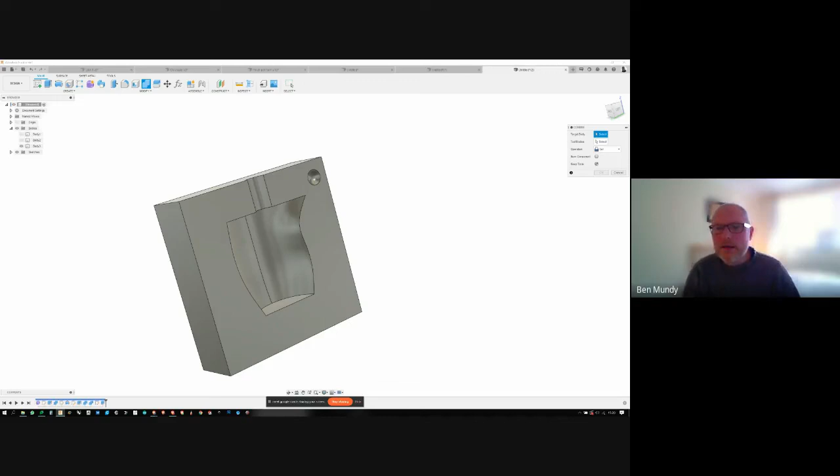Okay, so when you mean engraving the pattern that is 2D, what you can do is draw a 2D sketch over on any flat surface in Fusion and engrave with that, or push into that by doing the extrude cut function, if that's what you mean. I don't know if you did the Fusion 360 introduction part 2, because that kind of extrude cut would be in there, I would have thought.

Following up on that, we've got a question from Emin who wants to change the colors. So that's the sort of basic color you get, but you can change that. I don't know, Ben, do you want to go through it?

Yeah, that's a pretty simple thing actually. There's a lot you can do to change the appearance of stuff in Fusion, but I'll just give a brief overview. In the modify menu, we've got appearance, right near towards the bottom, or it's A on your keyboard. So if I click on that, there's huge amounts of appearances or materials you can apply to bodies and components within Fusion.

And there's a big library that's already in there. So fabrics, glass, leather, cloth, metals, paints, plastics, it goes on. But if you just want to change the color, I would suggest you go to the paint section, and then there's different effects of color, so glossy, for instance, and you just choose the one you want.

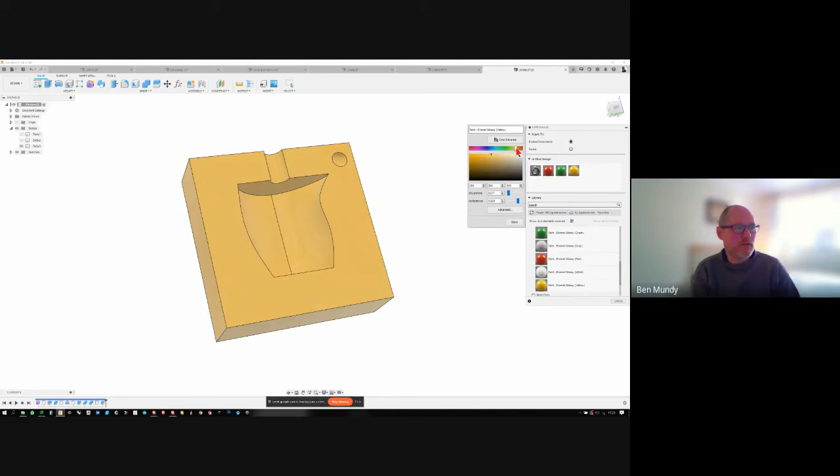If I right click on one of these, say the yellow one, I can edit it. And if yellow is not exactly what you want, you can play around with these sliders and turn it into whatever color you want pretty easily. There's a lot more I could talk about with appearances within Fusion, but that's probably a whole other workshop, a rendering workshop, which I think we've got some planned. But very quickly, that's how you basically change the color.

Once you've changed it to something like green, you might be better off just changing the name as well, so you don't get confused. That's what I do all the time. So now that will update, and that is paint enamel glossy aqua.

Just to reiterate, it's in the modify section under appearance, and then you open up these little folders and they've got all the different appearances in them. Let me try to find an example. Sometimes you have to download some of these. If you see this little sign next to these appearances, that means they haven't been downloaded to your computer and they won't work.

All you need to do, if you want to use one of these, is click on the download button next to it, and then it will be downloaded to the library locally on your computer, and then you can drag and drop it. So now it's a quite nice fabric red one.

Hopefully it's pretty straightforward. You can also work just on faces, so you can color the whole thing in, or you can just work on a face. If I click on faces up here, I can drag and drop onto any particular face that I want to as well.

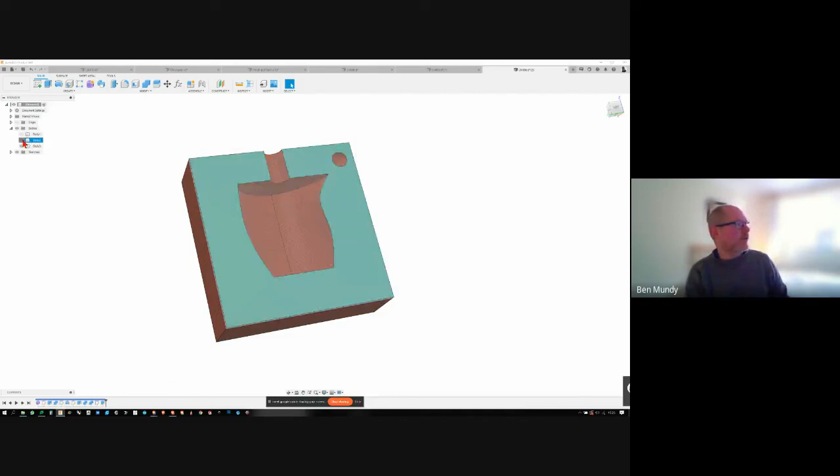Well, there's a number of ways you can delete stuff in Fusion, but say you've got this, you can just hide things, which is sometimes a good thing to do, just to hide them by turning them off and on, so to get them out of the way.

But if you do want to delete stuff, say it's a body, and say I want to delete this red body here, you need to go to the body menu, find the body you want, right click, and you can delete or remove. I would avoid deleting things unless you really want to, because you get this warning saying it's referenced by other things, meaning other features have used some of this geometry.

So I would suggest, rather than deleting things, the better option is to remove it, and then you've always got the option later, if you want to get it back, to unremove it, if you see what I mean. That's probably a better thing to do than deleting things.

Yeah, thank you. I was more thinking that just experimenting, playing with a program which I've only just downloaded, and you make a sort of complete messy object. You want to get rid of the whole thing at the end. How do you actually just get rid of it?

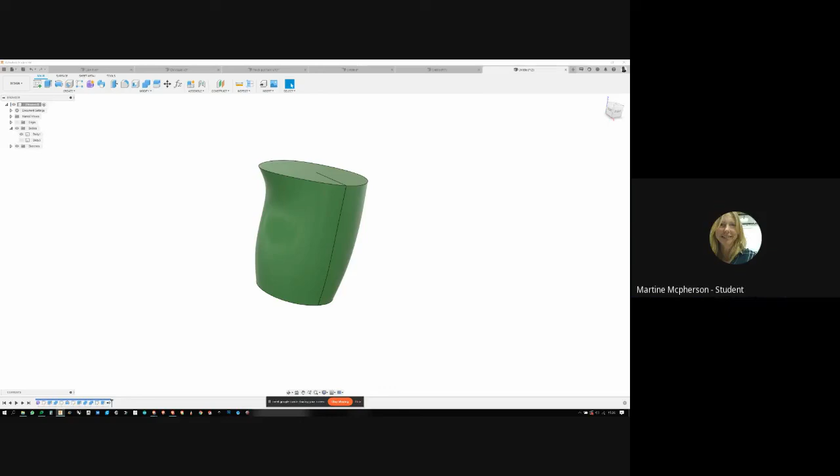Yeah, absolutely, you can delete it. Obviously, once you've done anything and it appears in your menu, your control panel over here, you can also delete entire files as well, just by right-clicking on them and deleting them altogether. So yeah, that's the other way of doing it, really.

What I would suggest, if you are going to play around with Fusion, is do use a mouse. It's quite tricky to use Fusion with a trackpad. It's not impossible by any means, but you're making life hard for yourself.

Yes, I think I'll order myself a mouse for this machine. Yeah, and if you do get a Magic Mouse, you can actually change in the settings so it does actually have a left and right click. So there is functionality there with Macs that have a left and right click.